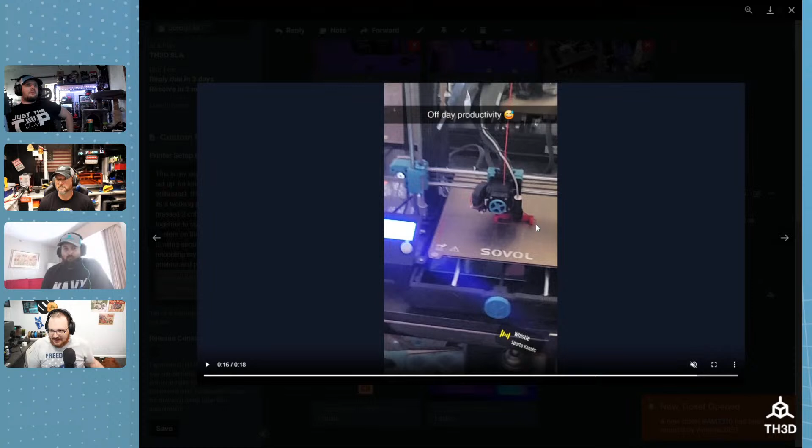Like that's a big ass bedroom. You guys see that? It's bigger than my master bedroom. But the Sovol here looks fine. Everything's in order. He's got some weird 15-50 setup here, but hey, if it works, who cares?

Yeah, like it works. So he sent in some other pictures here too. Is this on? Wait, what the hell is this? Hang on. How much thermal adhesive? Oh my god!

Is that two-part epoxy? The whole tube? That's the whole thing. And then it's like ground out. He ground it off, straight. Hang on, yeah, the red light district in the hallway. He just likes his RGB lights.

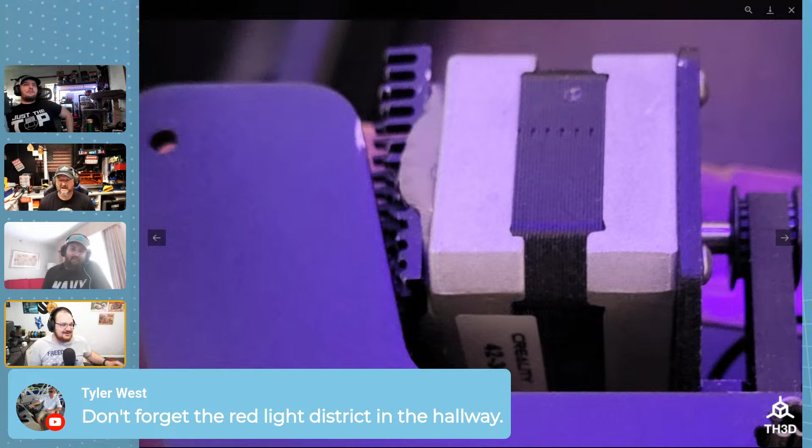I was thinking, is that JB Weld or is that thermal paste? I don't know, I think it's JB Weld. I mean, it'll work. Take a grinder to it. We took the grinder right to this though. It's for the bed plates.

So I think he might have mentioned a comment there. You can put it on the side or on the rear and the bottom, so you can have two there without it interfering.

Okay, so this must be the jank printer. What did he say here? He said, this is one of the first printer builds I tried to rebuild, I've been trying my best. It's good use case, why I probably should have sent it to you guys for the precision care. I fried the motherboard worse than a hot water cornbread.

Hey, I've fried my share of boards when I've been starting off, but you've got a bunch of machines that are worth messing with. The grinder is in the hallway with the red lights and stripper pole. Hang on, let's see, I'm gonna go back to that and see if there's a stripper pole in the hallway, because I saw—hang on, can we appreciate the laptop that's just propped up on a bunch of shit here?

It's sitting on top of the gantry. It is, I mean, it is a big printer. Okay, to be fair. Hang on. Wait, hang on.

Oh, we all saw a glimpse of it. Yeah, there's not enough of you there, and this video player sucks in our ticket system. So what I was going to say is...

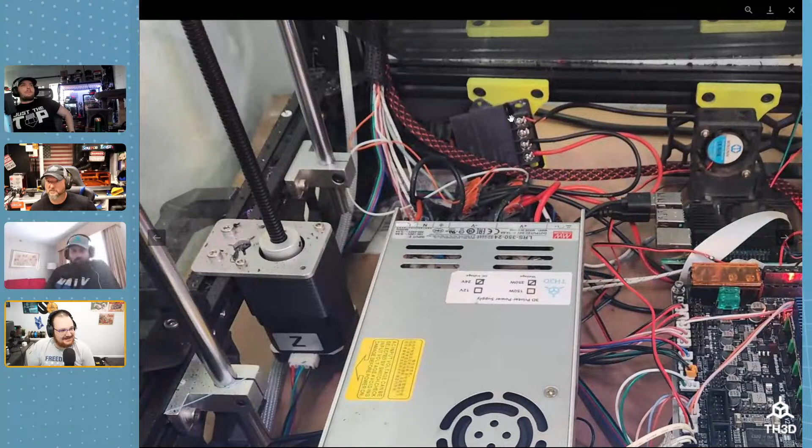So the power supply had died, and the new one didn't fit. What? That's powering the Pi. Why is this just thrown in there? Didn't have room, and I didn't have a mount. What is this giant spacer here for?

It's nice and clean. It looks like the lead screws were too long, and they were hitting on the hot end. Why did you just cut the lead screws? Are these Delrin lead screws? No, they're coated, just black coated. Why wouldn't you just cut it properly? I didn't have anything to cut it with. It looks like you were doing it with a handsaw.

20-minute print. It looks like those wires are trying to spell out SOS, the way they're curved around there. There is not a single zip tie in this photo to manage these cables. No, there is, look. I cannot. On the right. Wait, where? There's the lead screw. There's a cable tie. Yeah, there's one. That's not a zip tie.

Oh my god, look at the tension on a couple of those. There's not an overload of thermal paste there, so he does have that going for him. I expected better. Oh, you are using the Monster 8 in here. I noticed the CAN bus port is empty.

Everything's wired back to the hot end directly with plugs and everything. Is it? Yeah, but this is just like I had stuff lying around. I hate the enclosure top. This was the precursor to the Beast, and I've learned a lot since then. I think I did this like 2 years ago.

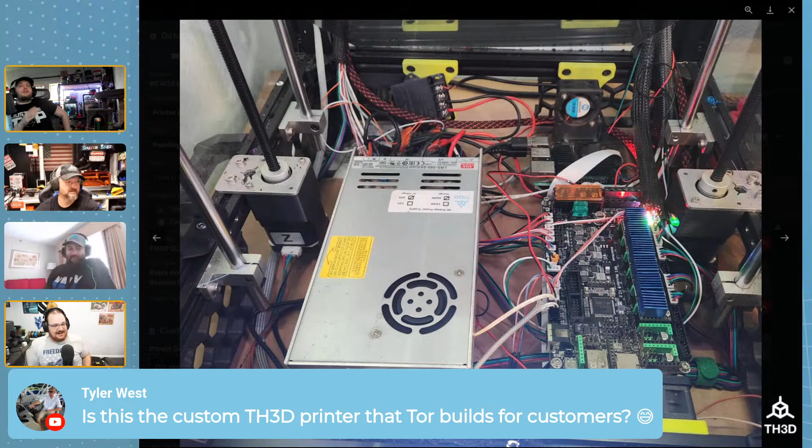I'm just shocked that your printer is this messy. Even all mine are zip tied and stuff. No, I did a lot better job on my other printers. Tor does not build any of our customer printers, Jordan and I do that, because this was the precursor. We actually understand how to do cable management, unlike Tor. I had good cable management at one point, and then I had to take it apart, and it didn't go back together. I can see that.

Let's see, the next one—I'm going to change this guy's account because it's just his name. Hang on, no, it's his email. Yeah, it's his email. I'm just going to change it really quick.

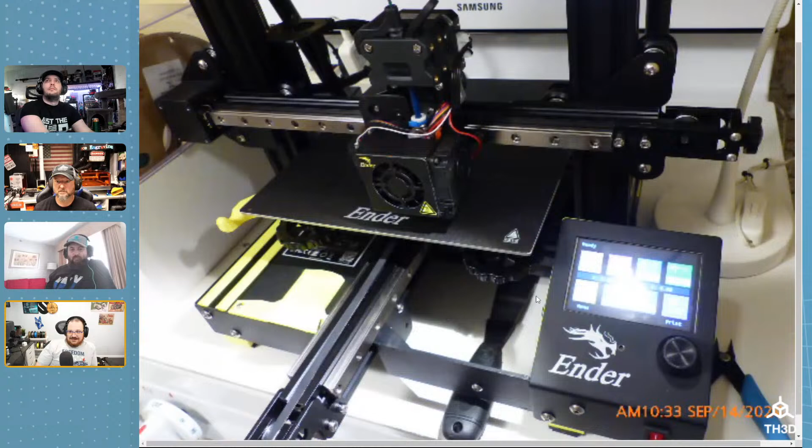I will say though, when I read that list of mods, I did not look at any of these photos before I started the stream. I was expecting with that long ass list of mods that it was going to be a horrible mess, and the wire management is actually pretty good on here.

Hey Tor, he's got your little grabber on there. He's got our new V2 bed mounts on here. He's got the little grabber printed out.

I was hoping for more yellow 3D printed parts because I thought it was going to be a full-on Velveeta theme, just like the rail covers. Wait, you have that grabber in PLA? No, wait - it does match the warning sign though. At least the PLA matches that. Yeah.

This was a regular Ender 3. Did he say this was a 3 Pro? Or Ender 3? Doesn't look like it, look at the center rail, the bed rail. Yeah, no, it's definitely the Ender 3.

But here's the thing with the rails, the Ender 3s with the rails, I did a rail upgrade kit on my buddy Sean's printer, and they fly. On the plus side, with it being on the stove, once you enclose this, you can just turn the stove on. You got a heated build chamber right there.

Assuming that it's an electric stove. And like he said, he's probably got the vent too, so he's already one step up. He's got the cooktop, so if it's a convection oven, it'd make a great filament dryer.

Maybe he stores the filament in the oven. I really want to know if this oven's plugged in. The only thing I could think of is maybe this is in a basement, and his house has 2 kitchens, because sometimes you'll have kitchens in the basement. I'm wondering if it's one of those situations where he just has an extra stove and he's using that for this, because that's taking up part of the countertop, which would make sense.

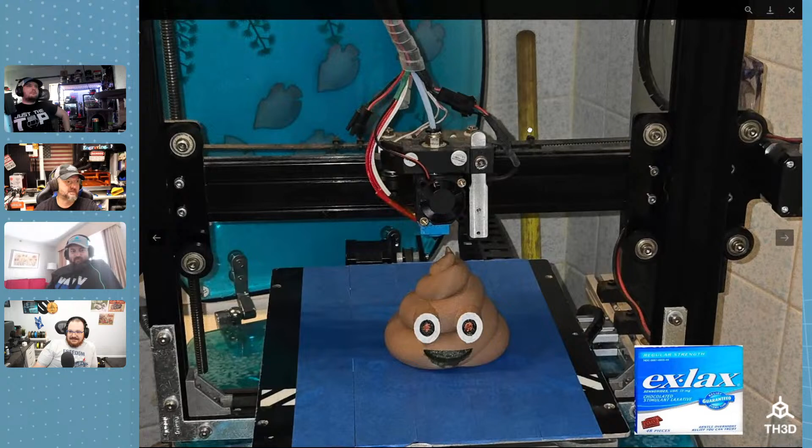There's not even a layer fan on this thing. Those 90 degree brackets, did he Photoshop some Ex-Lax in here? Those 90 degree brackets are Home Depot brackets. Are they? I can't remember if this came with one, pretty rigid.

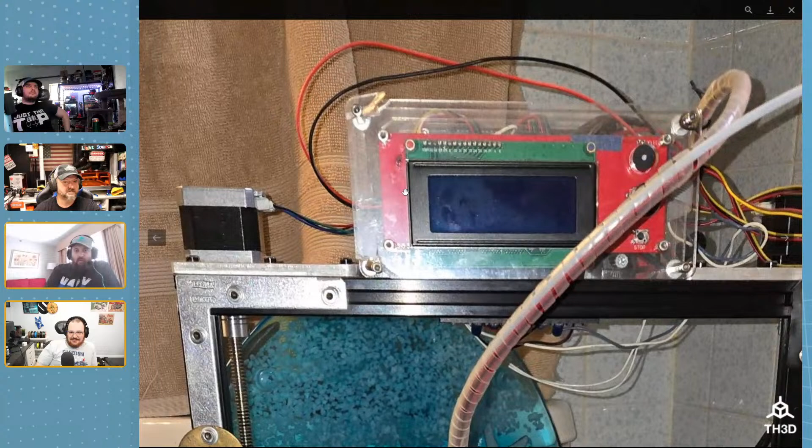Man, I haven't seen one of these in forever. Oh, it's got the old 2004 LCD. Yeah, these are Stanley brackets, they say Stanley right here. Yeah, they're the Home Depot brackets. Why is there just a 27 tag on here?

This looks like some sort of industrial tag, like a cattle tag. Is it? I'm pretty sure, gosh, that's a livestock tag.

He's got the shitter lid. I mean, yeah, there's... Why is it on? Is it because it's shit? Is that why you posted it in the bathroom? Tim, I'm guessing that your baby has better control over bowel movements than this printer has over the filament.

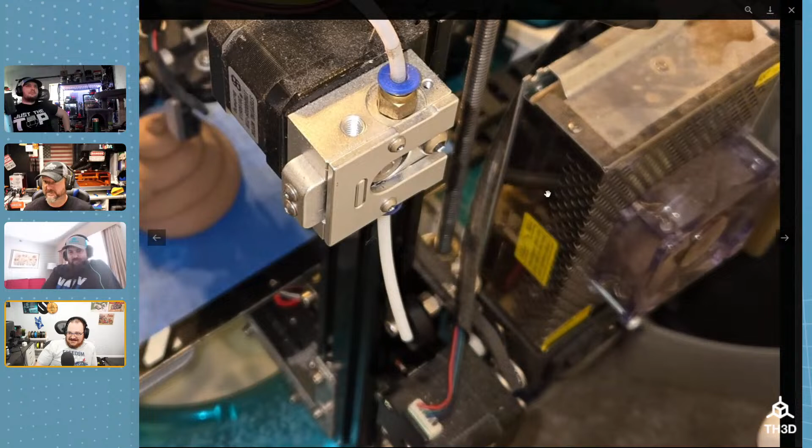That's probably accurate - oh my god, we got some old LED PC fan on the power supply, that's a fire hazard. Is that fan crooked? Like the actual fan inside the housing on the power supply? No, I think the actual fan hub in the center is tilted because it's so old. Yeah, probably, the bearings are probably gone.

I'm curious to know if this actually works. I remember seeing these extruders come out on the market. This was some Chinese company that put these out, and they were horrible. Look, you can see here he's had that tubing in and out a couple times - there's the teeth mark from the PTFE on there. I wonder if it just keeps pushing it out.

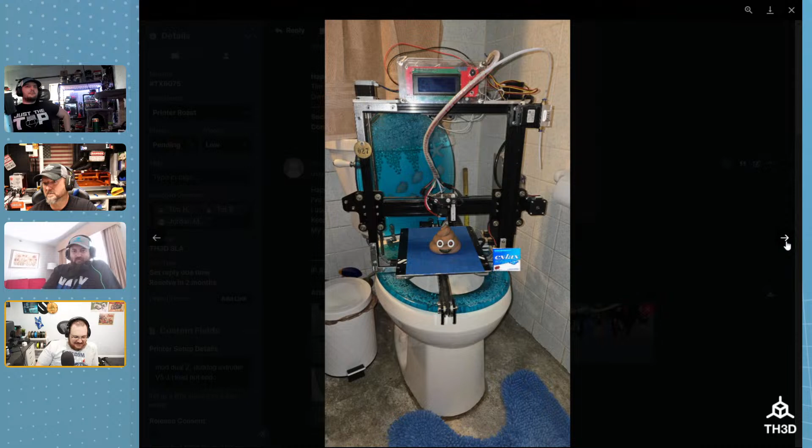I really want to know if this actually prints. Are there any more shots of this? Oh, hang on, I'm going to use my AI thing to ask - my neighbor's calling me. Yeah, that's okay, we'll see. Oh, I'll text him, he probably doesn't know that I'm streaming.

This thing looks like it has more tangles than wired earbuds. I mean, geez, where's a zip tie or two? That would be nice.

Why is the control board on the back of a toilet seat? Oh, okay, it's right here. What a wild setup - that's how it was stock, I'm pretty sure. This was one of the first printer reviews we did, the Tevo Tarantula.

Oh, that looks more like the Tevo Octopus. Is Tim the neighbor that doesn't like me? No, that's her husband. Oh, her husband doesn't like me. No, the wife doesn't like you. That was the husband that was calling me - it was Matt, Krista. Yeah, I want to know, I do want to know.

I expect a follow up on where to get this toilet lid and seat. Why is it number 27? Yeah, I don't know, is he - I don't know if he's in. He just had it in the workshop and was like, 'yeah, this will go on it.'

Okay, so that was Mark Logan. The next one here is Scott Kane. He said, 'Mr. One Printer here.' I'm just gonna change his name in our system to Mr. One Printer. He's got Klipper on it - oh, that's why he has one printer, he ain't got time for more than one dealing with Klipper. I like his space blanket enclosure.

You can get those toilet seats from Walmart, they're the clear resin ocean series. Wait, does this come with a 3D printer?

Hold up, what is this? Is there so much glue on this bed that it looks like a flex plate? Because I'm pretty sure this is the glass. That's not a flex plate, is it? No, it's just layers upon layers of Aquanet. Oh dear God, because you can see the clamps - you can see the clamps in the front and the rear, Scott.

Oh, it's glue. So how did you make the glass surface? Is this glass? Heck, you can still upload - yeah, that printer's still laying down layers. It's going to lay down its resignation.

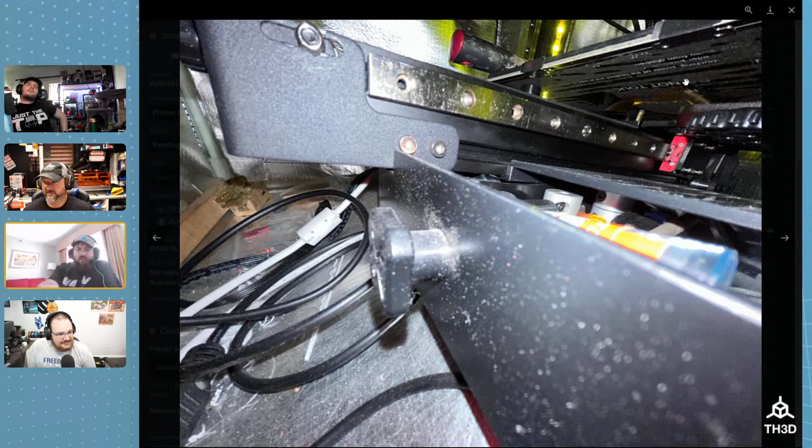He said it's glass, how did you make the glass surface? How did you get it so... what is that? Oh, there you go, that's a good angle, you can see it's glass now, you can see how thick it is.

Oh, did you put adhesive on an adhesive backing and then rip it off? Yeah, it looks like he had some sort of insulation on there at one point and then took it off - maybe he had to replace the thermistor or something. Oh, look at his hardware - the camera's just sitting there rusted. Is it? Where? On that last picture you could see it's starting to rust, on the rails inside there. Did somebody not properly lube them? Yeah, they need to be lubed.

Dad, this is something. Wait, we put rails on the Z and the Y - the axes that don't really need them - and then the X can just use rollers.

Why is the Pi in the enclosure? Do you hate your Raspberry Pi? Look, the cords are long enough that they're coiled inside the enclosure. He's baking that Pi. Had to replace the thermistor.

Yeah, that's a pain when you insulate the bed. I mean, if you clean it up it would look a lot better. Man, I hope he wins this so he can buy a flex plate.

Your first layer is way too close, bud. Way too close on that first layer. If it's embedded into the glass, that doesn't tell you.

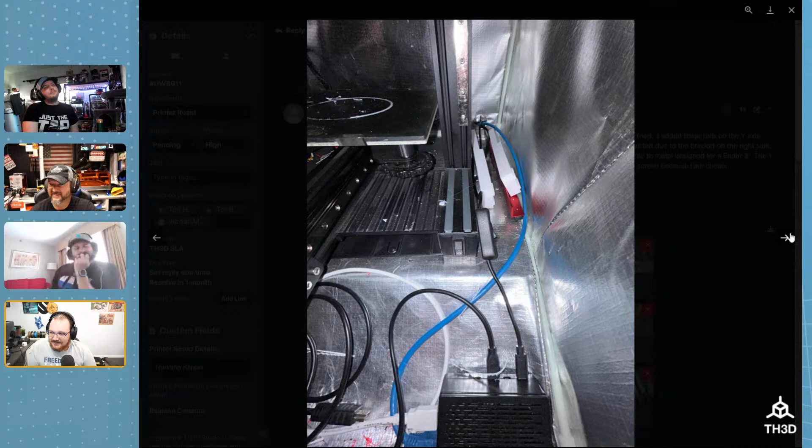Wait, future upgrades - he's just prepared. Hang on, what is this down here?

There's like a random block. No, it's like a thing of putty or something. I have no idea. We got the mega brush.

Oh well, see, he figures if he's gonna bake the main board, he might as well bake the Pi too, so they're both equally baked.

Okay, so this is from Steve C40. He's got a Bambu X1C, a Mini, and a V0.2. Let me - this one was like an attachment, I think this is the same photo.

Okay, so we got clamps. I will say, is this the official Bambu mounting for this? Because this is a horrible idea, having all of this weight on top of this.

Oh wait, hold on, I spoke too soon - it's bolted to the wall. I was about to say, man, you were ballsy putting 4 freaking spools of filament on top of this printer. I was about to tell you to take that off because you're just going to be absolutely screwing things up.

Okay good, oh it's a spare Revo nozzle on the last printer. That little box - oh, and a box. Okay, I was wondering what that was. Let's see.

I'm just looking here, studying the picture. Oh wait, someone has an HTC Vive.

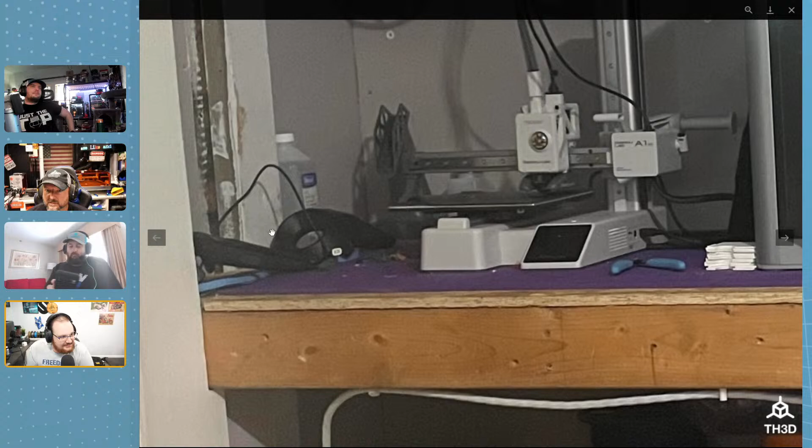Tor, I have my stuff right here on the wall. Yeah, Tor has my old Vive - I gave that to him when we decommissioned it.

Glue stick - someone likes glue stick. Some sort of, this looks like a flashlight charger and mount here. Streamlight battery, is that what that is? Yep. Are you a flashlight nerd? No, not really.

But see, he needs more clamps - all the clamps. There's still space on that shelf.

Wait, what is this - is this an AM8? This looks like an AM8. I have questions. Tilted Z.

This looks like an AM8. Is this an AM8? I hope he's in chat. Did anybody see if he's in chat?

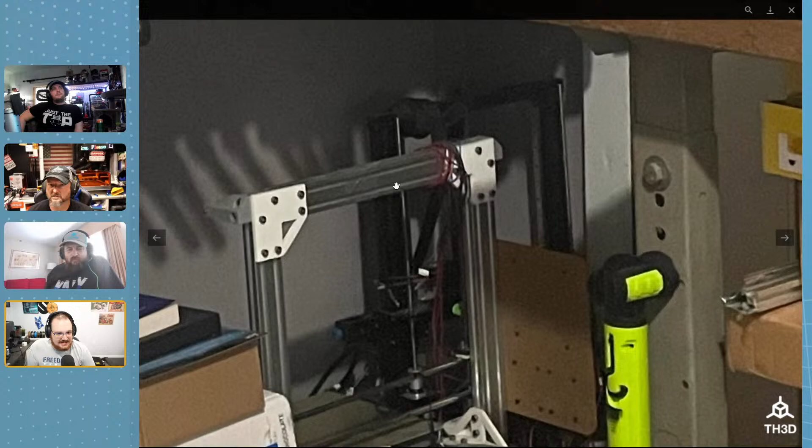There's another printer back here. This looks like an Ender 3V2, look at the tensioner here. Right, well that's what I was gonna say. It's a V2 with linear rails on it.

Why is this just sitting here? No, that's lead screws, because he's got a Bambu. This definitely looks like an AM8, which is a metal frame conversion on Thingiverse for the ANET A8.

I'm assuming this is his V0.2 Tor. It's right here.

It's just not completed. Is that gantry crooked on that printer? I can't really tell. I think everything's crooked on that printer. Yeah, that Z looks like it might as well be a roller coaster.

Something tells me he said, I'm tired of figuring out how to run a printer, I'm just buying a bambu and throwing these on the floor. It's like, screw it, play with these later. Then he starts to build a Voron. It's like that Toy Story meme where he's throwing the toy in the bin because he found a new toy - that's literally what happened here. Just letting him decay.

Is that a PS3 sitting down here? Does it look like PS3? Looks like PS3. He's got a resin printer.

So this is just the printer graveyard of stuff. We're just gonna forget that these exist and move on with our lives. I would say those printers specialize in printing sorrow and despair. I don't think they're printing much of anything anymore.

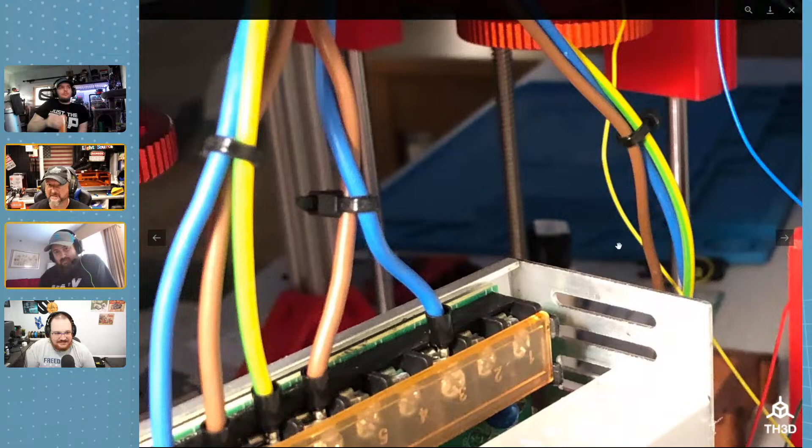Hey Tor, he used zip ties. Yep, he used zip ties. I have a cable tie in there. So this is under the board - this is impressive for a 15-year-old. Like, this is impressive for a 30-year-old making their own printer. Yeah, it actually is pretty solid.

And we got the dual Z's driven by a single stepper. I'm assuming this closed loop belt's going to go over to here. I don't know what he's printing them on, but the print quality looks decent on the parts he's printing. It's a good start to a machine. It's pretty cool, I'd honestly be curious to see this actually running.

I like the Core XY, I just hate the belts in the front. Even like the rook, yeah, it's like I hate that. Yeah, I like the belts in the rear, like on the Mercury, so you can actually see what's going on.

Oh my god, I'm sorry, I'm yawning. I did grab some caffeine. I mean, I really can't shit on it too much. This is actually a pretty nice build, it's pretty solid.

Yeah, no, definitely. All right, our next one is from Kirk, and Kirk says he's got a Creality Ender 3 V3 Plus. I haven't seen one of these. He relocated the filament sensor run out to the top and a top mounted spool from Embrace Making. He's running about 200 millimeters per second, no support at 210. Creality hype. I thought he was printing, but no, it's just

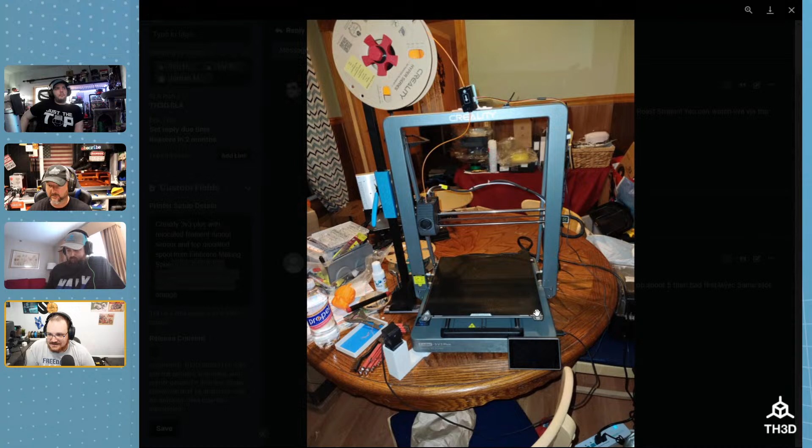I do not like it. There's so much stuff in here, though. And a square printer on a round table—that's just bothered me. Wait.

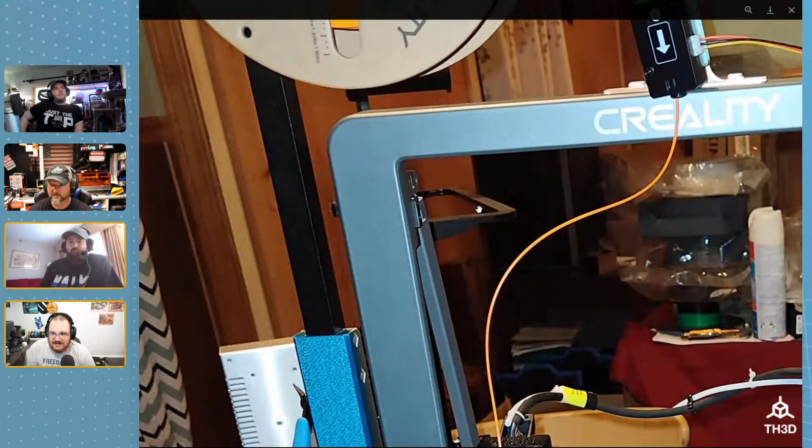What is going on? Oh, this is an aftermarket printed shroud. With some maybe banding going on here. Either banding or... wait, hold up. What? Okay, hang on. So he's got this, like, isn't this the DIN rail mount stuff? Yeah, and this is bolted to the printer, and that holds the spool.

That's interesting. Look at all this stuff back here. What is going on? There's so much crap here. What printer is that? This has got power.

This Ender 3 V3 Plus, which is their Core XZ printer. I'm sorry, do you see when I move this, the image just wants to keep moving? That's just whatever image preview on our ticket system is doing that. I don't know, what do you guys think?

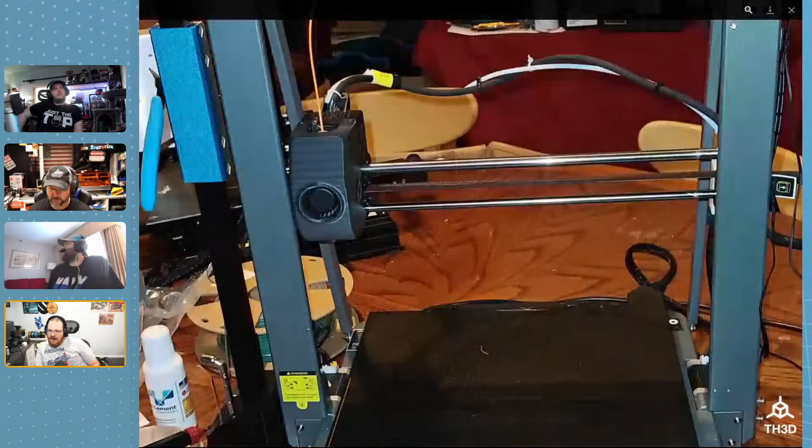This is like the room in your house you throw everything into. What's at the front left corner of that printer? Just a camera bodged on there. Oh, but look, there's hot glue.

There is hot glue, I spotted some hot glue too as well. Assortments—there's like four assortments right here in a Tupperware container. Wait, there's another printer back here. There's an Ender 3 here, sitting in the back.

I gotta know, I want to know if this is how this printer is used, or if he just works on it on this table. Like, I have a feeling he uses the printer on this table here. That is his home. The rest of the house looks like it's in fairly good order. Maybe this is like the one room in the house. His wife's like, 'You're keeping all your stuff in here since you don't know how to keep it clean.'

Okay, did you write that one down there, Tor? Yeah, Kurt. Let me see here. I gotta just change the user so it doesn't show their email. Oh, these next two are refresh it because I'm merging them, they're the same person. Okay, wait, the Moundby one? Yeah. Okay, let me know when it's merged. I'll refresh it, I merged them. Okay, let's see here. All right, so Moundby one says here, okay.

So he's got a Core XY that he shipped across the country. 'Could fix this?' Huh, I don't know what that means. All right, oh—ooh, oh yeah, shipping is fun. Someone shipped their printer fully assembled and didn't lower the bed all the way and pack it down.

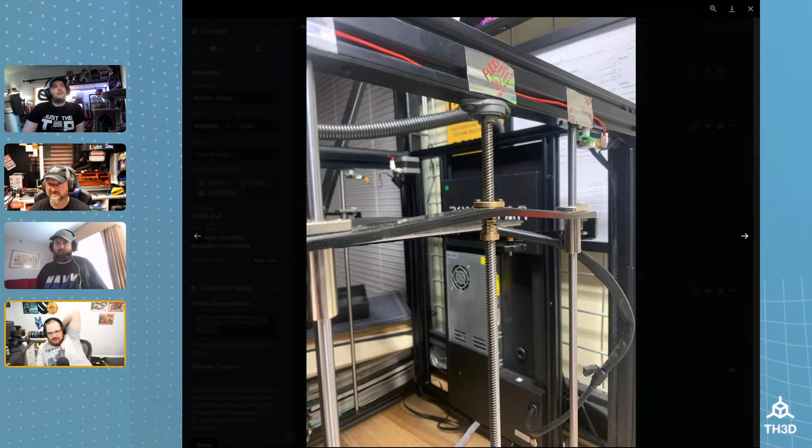I haven't seen a Zone Star printer in a while, I haven't even looked at them. Are they still in business? Was this an old printer that you bought off somebody? I'm really curious. And then he's got an A1 part that came loose.

Oh, effing chat, oh that's not gonna—that is not gonna be fun. Yeah, well it's on the duct and everything. That's roasted, I would heat that sucker up and start trying to pull things off. If not, then hit it with the heat gun. And now that's when it's handy to have your printer built on an oven, because then you can just heat the whole thing up, stick it in the oven.

Oh man, all right fellas, I gotta go, we gotta go take the boy out to dinner. Oh, you're fine, I know you had something else going on. Yeah, he got his orders late, so instead of him leaving tonight, he doesn't leave till Sunday morning, so we're gonna stay out here in Chicago with him. No, you're good, you guys all over your sickness? No, because now I got it. Oh, that sounds fun. Yeah, Taco Bell nightmare. You guys have fun, we'll see you later. All right, tell him good luck.

This is later, Emerson. So this is a prime example of how well Bambu's AI failure detection works. Oh yeah, that one does have that, it does have the failure detection. Man, this looks like this was a fairly decent printer. Is this a Core XY? This looks like this is a Core XY. Yeah, I think you said too, yeah, because the motors are in the back. You got one left, man, that's painful.

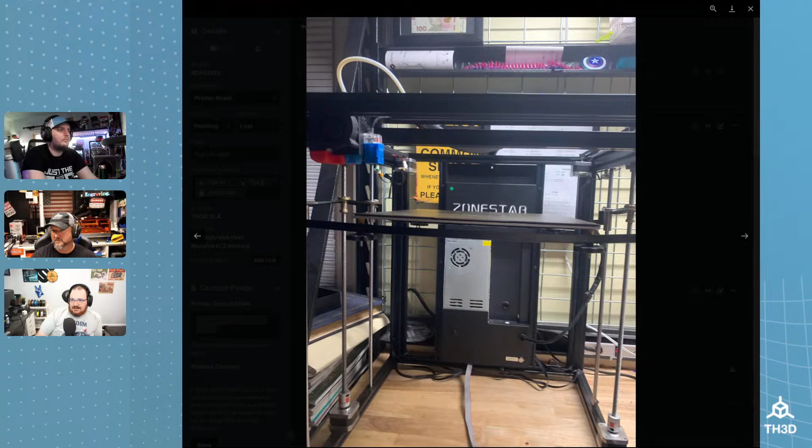Bambu Lab A1, I'm just going to go to the A1 page. I thought it had it because it's supposed to take pictures and every so often send it off for processing to their cloud. Was that the A1 or the A1 Mini? I got to double check. I think that's the A1. Yeah, that's the A1. I could have sworn the A1 had AI, that was like one of their things. Or did they not put that out for the A1? Doesn't the P1 have AI detection? No. Because it's... hold up.

Filament tangle sensor, filament runout sensor, filament odometry, low rate camera up to 1080p, chamber monitoring camera, it says it has. Yeah, on the A1 you can just view it. Oh, so okay, I learned something today. I did not know the A1 did not have the failure detection. That is really interesting. Okay, well, I learned something today.

Thank you, Feven. The P1 camera actually has a better quality picture than my X1C. Like I'm not even joking, it literally has better quality than my X1C. My X1C's camera is horrible for how damn expensive that printer is. Yeah, it sucks, it's absolutely horrible. My P1S is not a very good camera at all.

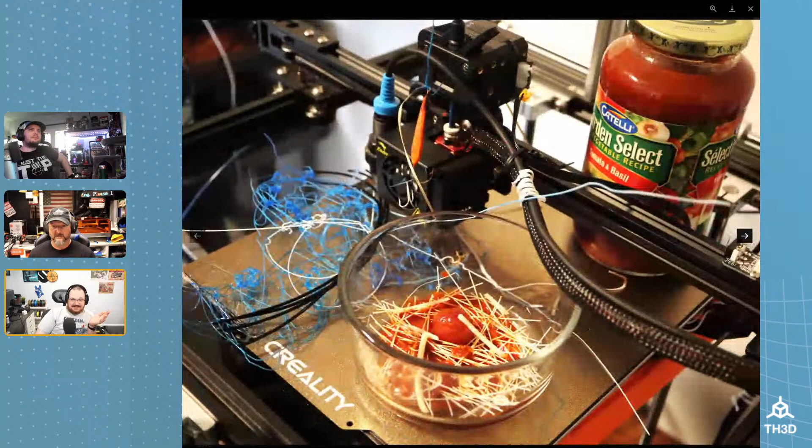If you're not getting a first layer down, I would change this. This is actually going to affect how it prints quite a bit. We do offer tech support, so if you want, we can sit down and I could definitely get this thing running over a video call.

This print looks like a cry for help from that printer. It's like, man, the Italians are not thrilled with me. My question is, did this print? There's Italians that are like, why? What is it with Italians getting so upset about you not doing exactly what they want, like they're ruining our culture? Okay, this guy never sent pictures in, so we're just gonna trash that one.

Steven Altman's next. Let's see, got another Bambu X1C. I have it in the den off the living room, and it's very loud compared to my A1. Yeah, the X1C is a loud printer. So if I chose to try to quiet it down, it has a muffler, and the engineering failure of having a fan with the doors having to be open and the top off is absurd.

The fan never gets used, the advanced filament mode doesn't matter. I guess it filters the dank air when the door's open and the top is off the printer. I mounted 2 fans on a custom bracket, placed inside the filter housing so I can keep the door closed and the lid on, so it's quieter - drastically decreases the noise. It's wired into the power source and back in tandem with a modified bento box with a thermal switch. When the temperature gets to 35, it turns the bento box on as well as the exhausting fan. Keeps temperature between 33 and 37. I unplug it when I do advanced filament.

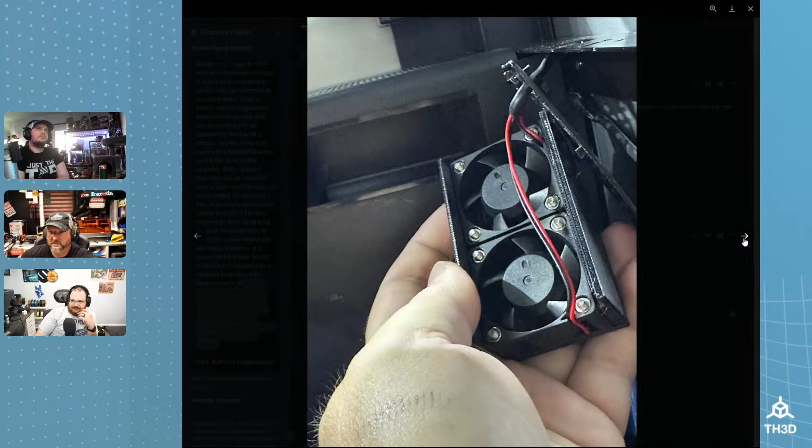Well, that's my little Frankenstein. Let's see. Okay, so there's your bento box. Oh, it's all taken apart right now. Okay, so these are the fans he's talking about in the little back box here. I hope there's a picture of the actual printer in here.

Holy glue, Batman. Holy fucking glue bottle. Oh my god. Wait, where is this going? This obviously connects to here. I think it's coming from the bed. It looks like it's coming from the bed, doesn't it?

Hang on, is there more pictures? No, that's it, this is all we have to work with. What is going on with... I want to know what this is for and why this is going... unless it goes to the bento box, like this wire's going down here to the bento box. But the bento box has power right now.

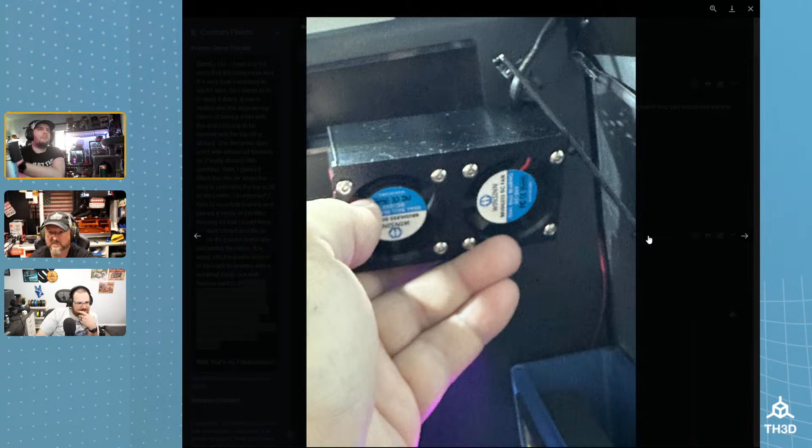Were those the only 2 fans he added? That's what... well, there's some in here in the bento box, but I'm very confused as to what this other wire is. I have more questions about this extra wire coming out here. That's going to the control board in back, or the power supply. Wait, no, here's a wire here going down to the bento box. What is this one going to the bottom of the bed for?

Wait, did he... hang on. Is that for the door open, the thermal fuse that he was saying? Oh, that might be for the thermal fuse going to the... that's a weird place to have it. Well, it's on the bed, so this is probably what this is. That's probably what it is - a thermal fuse, or the thermal switch, I should say, not a fuse. That's the only thing I can think of because he mentioned the temperature - when it gets above a certain temperature, it turns on and off.

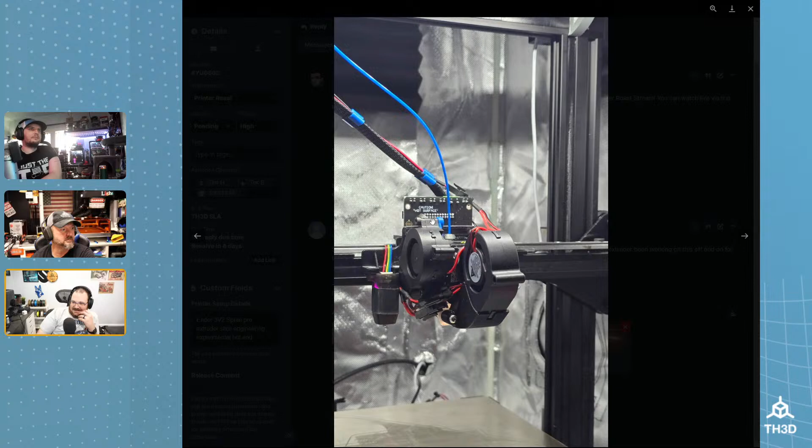Oh, he's got the little Nathan Builds Robots breakout board here. On the Ender 3 V2, that doesn't have a breakout board on the hot end. I wonder if this is like his quick swap thingy. You know what I'm talking about? Nathan Builds Robots made that quick swap thing, I can't remember what he called it. This doesn't look terrible, look at, he's got clips for his wire management.

It's a Sprite extruder. Oh, he's using the breakout board, the Nathan Builds Robots breakout board, for the Sprite extruder. Because there's a Sprite extruder here, and he said he's got a prototype hot end from Slice.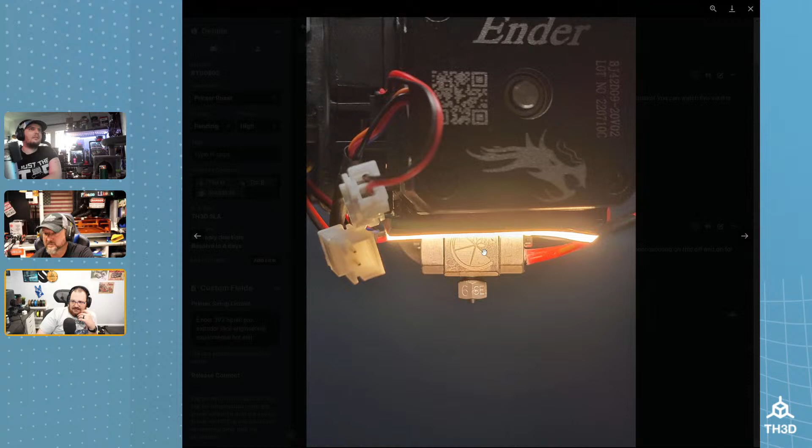This looks like maybe the Copperhead. Is that the light Copperhead? That worries me. It's okay, the double stick tape will hold it. It's definitely not going to come off during a print or when the motor starts getting warm, and just short everything out. Some JB Weld will fix that.

Oh, it's okay, we got a structural fan duct here for the light in case it falls. Ah, there you go, it's right into the heat sink. Oh wait, hang on.

We totally missed, he's got rails on it too. We got rails going across the top here. Are those rails floating? Hold up, go back. Why are they floating? They have spacers. That's not how that works. There's spacers. Why? It does bother me too. It's probably for the belt alignment.

Go back, like to the wire loop on the left side of the screen. Hang on, I think it was right here in a previous picture. Yeah. Why does that look like everything, all the wires were just sliced and left? I think it's just the braiding, maybe, on here. Yeah, I think it's just the cable braiding. Yeah, I guess so, he cut where he cut.

Okay, hang on, so how is the belt getting routed? The belt is still, I think the belt's going... no hang on, the belt is still going under here. How are these attached? The belt's still going through the stock path. How is this rail attached?

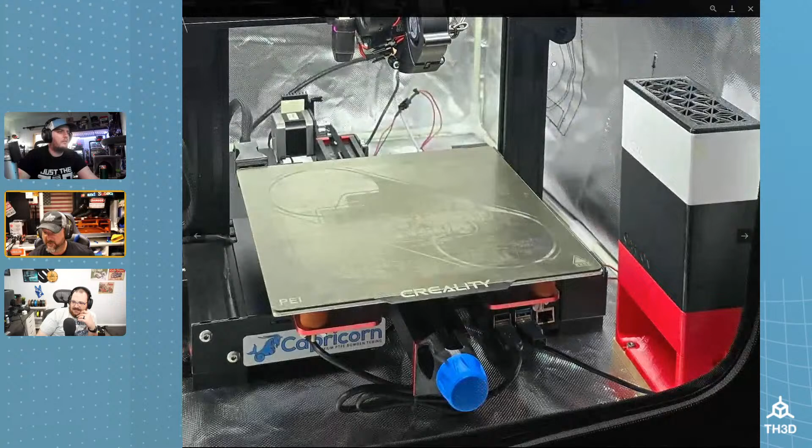I'm gonna look at the details here. Yeah, I have questions. Yeah, see all the USB ports? What, okay, what is with people putting Pis in their enclosures? This is horrible for the electronics, there's these Pis.

Yeah, another bento box as well. I appreciate my printer so much more after seeing everybody else's. Got some extra wires in the back too, those look nice back there.

Yeah, just hanging out. I want to know what this is. I'm very curious as to what this random board is, it's got power, there's an LED on it. I'm very curious to know what purpose this serves and why. I could be wrong, but this looks like a rectifier.

Is he in? Who is this again? Ethan Stewart - is he in the chat? Is Ethan Stewart in the chat?

This is why I wish people would actually come on. I mean, you could win regardless because you guys are going to vote on the worst printer.

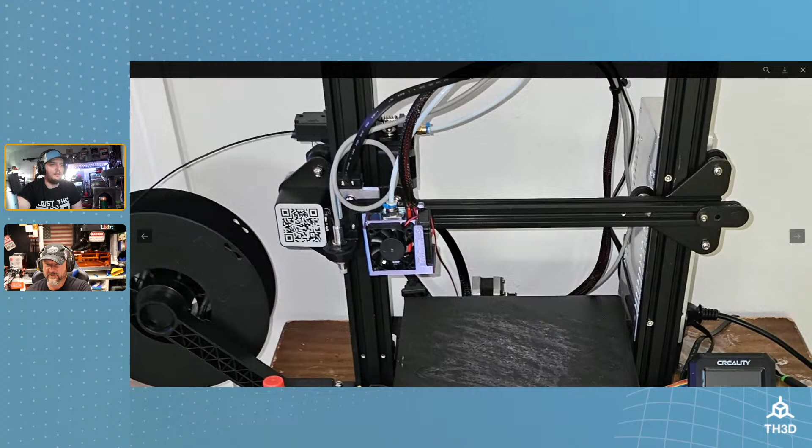Ender 3 V2, I believe, with the color touchscreen. Old EZABL Micro, that's not - oh, our second bungee cord of the day. What the hell is this on top? That's what I was trying to figure out.

Let's see, yeah I mean it works, but oh wait, he just has the Ender's - you have mounting points right here, just screen and screw it in, no plugs, just nice. Multiple SD cards - got one in the printer, one on the side. God, that's going to be gone in the Taco Bell bag very soon. I like the finish on it, looks like an end table, nightstand. Right, it looks nice.

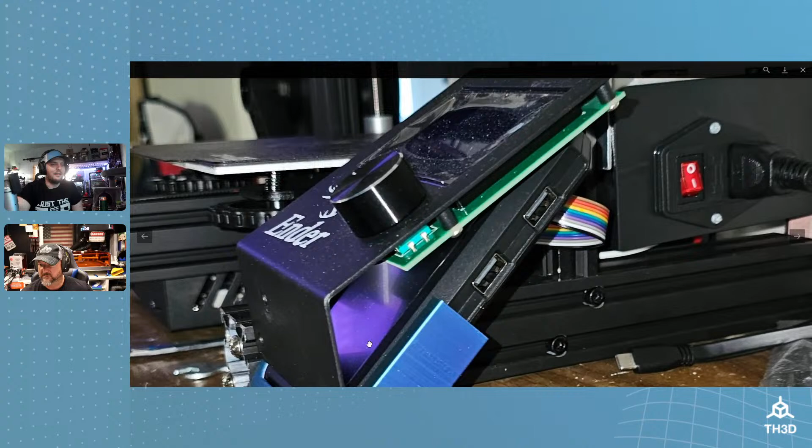Why? He really likes his filament because that's what he did his duct in, and I'm betting it's PLA. Oh, he still has the original cover on it too. Yeah, peel the screen, please. He's running both. All the dings and dents from like 50 years of use. He even has the bolts - he has the bolts for the screen in the extrusion.

They weren't there in that other picture, were they? No, I think they were. Were they? Yeah, they are. They are, oh there, yeah they are. They are, there they are. Wow, just come on, just remove this.

What, like you have the printed part? I don't know why you don't need it, just plug in the screen. Oh wait, where is it in this picture? Is he - oh, I think he switches between the screens. No, why would you switch between screens?

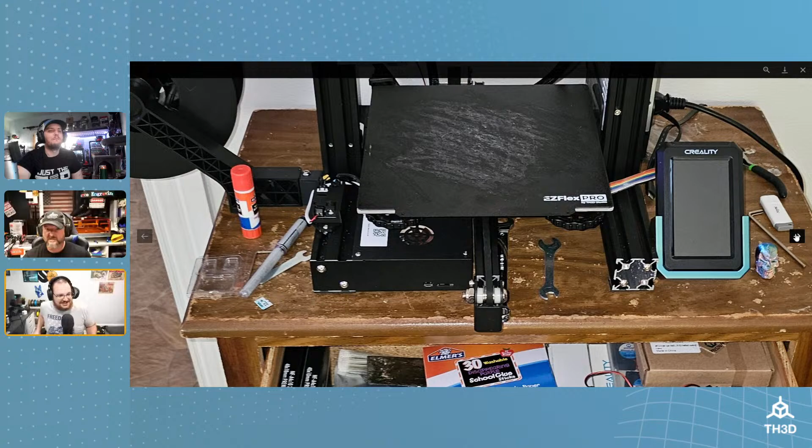Yeah, pretty much. Oh, Winsinn fans - he had to get the pack because they fail so often.

Winsinn knows their stuff is terrible, that's why you can get like 100 fans for $20. True, but the duct is PLA. I can tell, and it's not just PLA, it's a silk. I wonder how many times it came around the corner.

It depends on what silk it is, because some silks, like what we carry... Years ago the silk PLAs, like Poly Alchemy, was the first one I know of that came out with silk PLAs, and the layer adhesion was dog shit. It was horrible. But the newer stuff from us and other companies has typically been better.

He changes his fans out so often he didn't even bother to put bolts in. I think that's a toolless head. Was that Minimus? How many times do you think they've rammed right into that spool holder? It's kind of sticking out right there. You'd run right into it, and it would absolutely knock the entire printer off the shelf. Yeah, that's probably why it has so many scrapes and dings in it.

It reminds me of one of Krista's extended family stuff - this is triggering me. He has a bolt for the screen because he's running the Nebula pad on there.

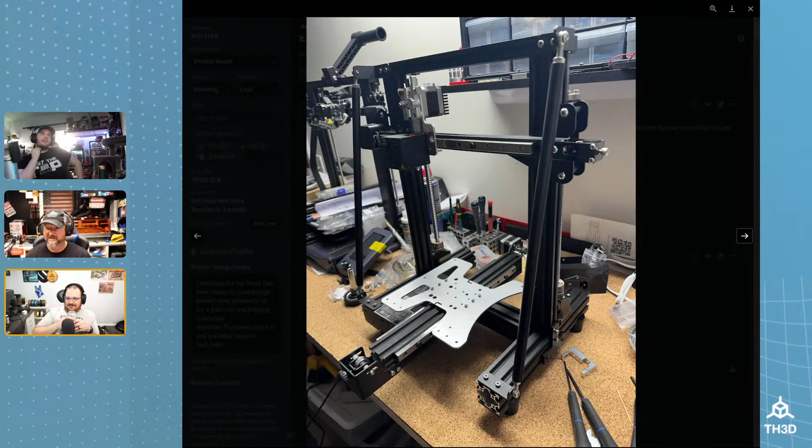Let's see here, so linear rails. He essentially just bought an old car to fix it up and never drive it, is basically what he's going with this. Yeah Tor, that's a fucking ball screw on an Ender 3 Pro, that's a really expensive Z-axis. Holy shit, 2 of them, he's got 2 ball screws on it.

Well, he has a working printer next to it. I know, but I'm saying it still has the peel on the screen. I don't even think that one's being used, that's just the next project.

In all seriousness, if he finished this it would actually print pretty good. The Z setup looks solid. He's got linear rails on the X and Y. This would legitimately probably be a pretty damn decent printer if he finished it.

Yeah Jerry, I love that you're into the hobby stuff, it's fucking awesome. Man, if my dad got into this I think it'd be awesome. They have a printer, I gave him a brand new one, and we upgraded with our stuff, an Ender 3 S1 Pro, so I hope one day he gets bored and starts playing with it. Look, he's even got the fancy ass leads, these ball screws, and these couplers are worth more than the whole goddamn printer.

Like, he's got those XYZ cubes or whatever back there? He must be a machinist. Did he say he was a machinist? Hang on, all right, where he got the feed screws. Yeah, maybe. I would put money on he probably was a machinist.

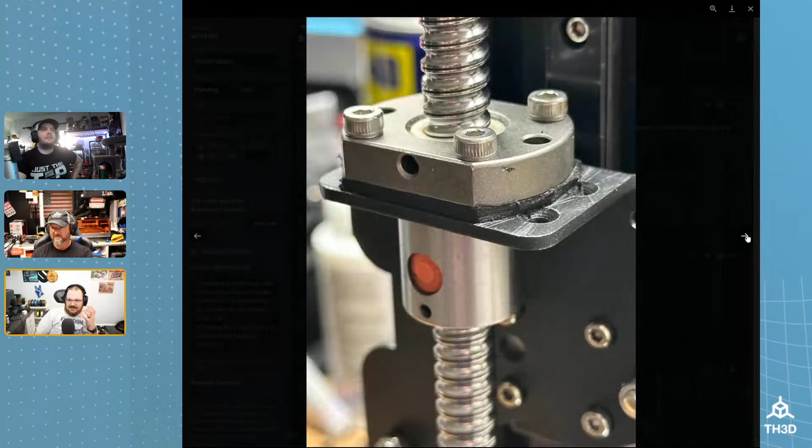This doesn't look bad at all. If somebody brought this to me to work on, I'd be like, hell yeah, we can get this thing flying. He's got a proper sized heat sink on that extruder. Okay, it's got potential.

Let's see, the next one is from Christopher Ford, and this will be a quick one. This is just a pile of parts. Tori, you should recognize this one.

I spent 2 hours on support calls helping this guy get going. The X and Y motors were swapped, as well as the X and Y end stops. He's like, why is it not printed correctly? Why is it not homing correctly? I'm going through the config, checking his wiring. Most of the wiring was wrong, so we had to go through all that. And then like a week later, after I sat through these calls with him to get everything going...

He did this a month ago. Tor was like, oh my god, why did he do this? He was so angry. We had it printing. We had it working and printing. And it's gone. That's not printer setup details, that's not taking it apart. Dude, that's not maintenance, that's not just taking it apart for maintenance. It's about to go into a crucible and be melted down to turn into aluminum bricks. We had everything working. Let's be sympathetic, he probably had so many bad memories. He was traumatized from the printer, and this was his way of dealing with it.

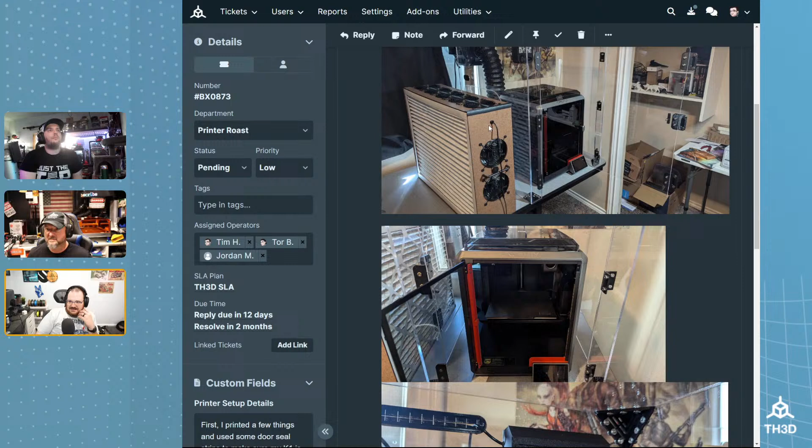He must have a laser. I really don't want to smell my... Yeah, it looks like a nice MDF box. With a nice... I don't know if he made this enclosure. Wait, hold up.

Yo dog, I heard you like enclosures, so he put your enclosure in an enclosure.

This is already an enclosed printer. Doesn't that have a... It has an exhaust, it does. Wait, hang on.

I don't think this is for the printer, because look, he has this venting outside. Okay, I think this is just a DIY HEPA filter for the room.

Maybe that filters the air that's going into the printer, that way it's getting nice clean air. Hang on, so we have a filter here, we also have it exhausting out of the room, and we have a printer that's already enclosed inside an enclosure.

Do you just not like having money? Because this is not cheap. This is at least $300 to $400 between the fan and all the acrylic and all the other random shit. Hell, that exhaust fan alone is probably like $120.

Oh, it's Clearview plastic, so this is an enclosure that a company makes. He says: printed a few things and used some to make a door seal strip to make sure my K1's airtight. I put together one of Clearview Classics enclosures to house the printer along with recirculating HEPA.

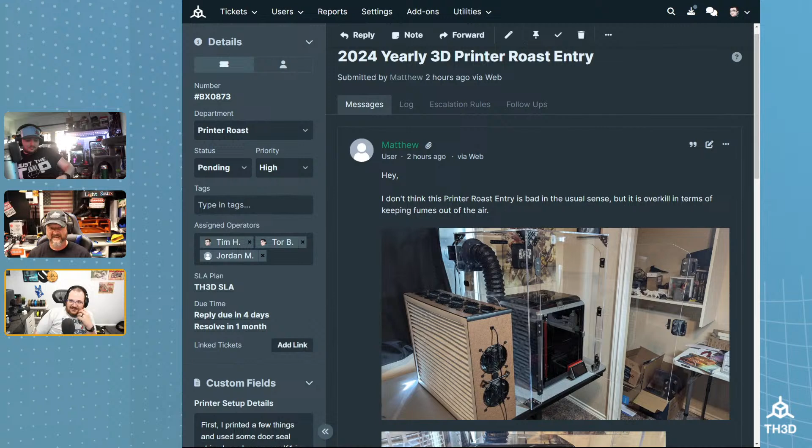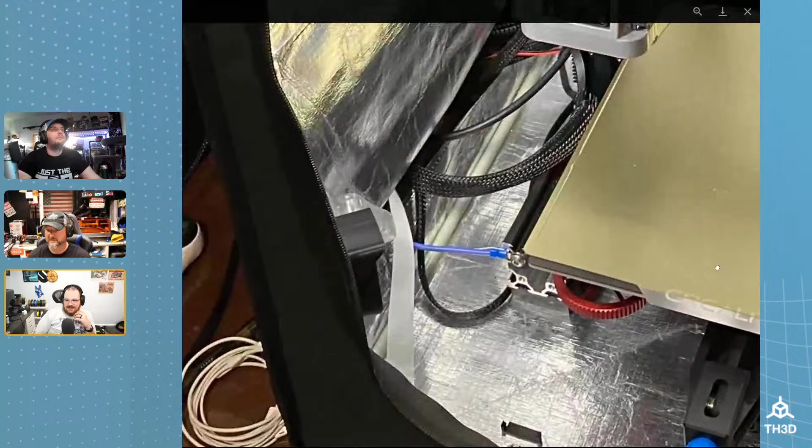Did he ground the frame? I think he grounded the frame. Oh, I think that's the first grounding wire we've seen. Oh wow, oh my God! He grounded the frame. Hey, let's just take an overview here.

So we got a heatsink on the Z step motor. That's not really neat - wait, hang on, these are not going to do anything, all the heatsinks. It's like he has some spare ones from his kit, bought a 10-pack for his Pi, and we're just gonna throw them on the top of there. He arranged them like he was doing tile too, all in these different directions. Yeah, you want all those heatsinks, fans?

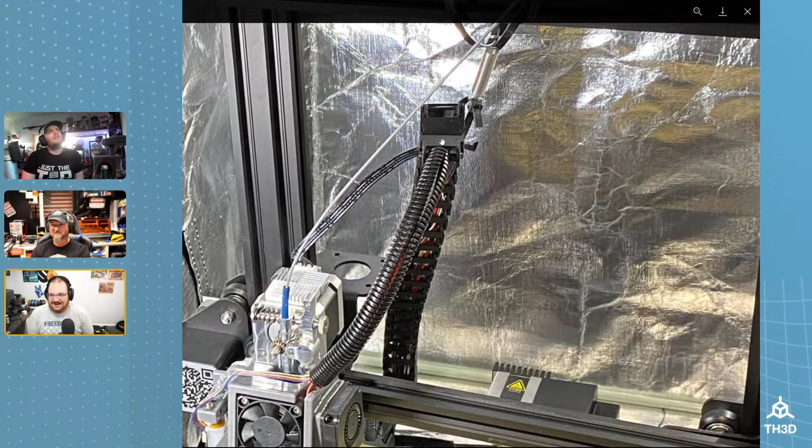Wait, hold up, together, look at the fucking cable chain. Hang on, we have zip ties with a spring, with another zip tie going to a cable chain, and then a corrugated wire loom coming out of the cable chain. Why? Oh my God, that cable chain's got to be heavy. Oh, that's why it's held up with steel parts.

This is painful to look at. Just get rid of the cable chain at that point. It's literally doing nothing.

Okay, we got these weird lights. Look at this weird tube light in the back here. What, is this a fluorescent light? Like, what is this? No, I think that's an under-shelf light that you stick on underneath. It's all blown out because I can't really make it out. It's so weird. Yeah, like an under cabinet light.

I mean, if you want to print ABS, that works. Yeah, this. Or at least you got everything out of the enclosure.

Why is the spool holder so long? Why is it sticking out so far? He's compensating. It's okay, it happens. So he can use the 3 kilo.

So here's the problem with this. This right here, this is rigid. This tubing is fairly rigid. This is creating a pinch point here as this head's moving back and forth, and these wires are going to break right here at some point. This should be tied off. I don't know if you guys know this, but on the Micro Swisses, they have these little holes here on the extruder arms. These are for cable management.

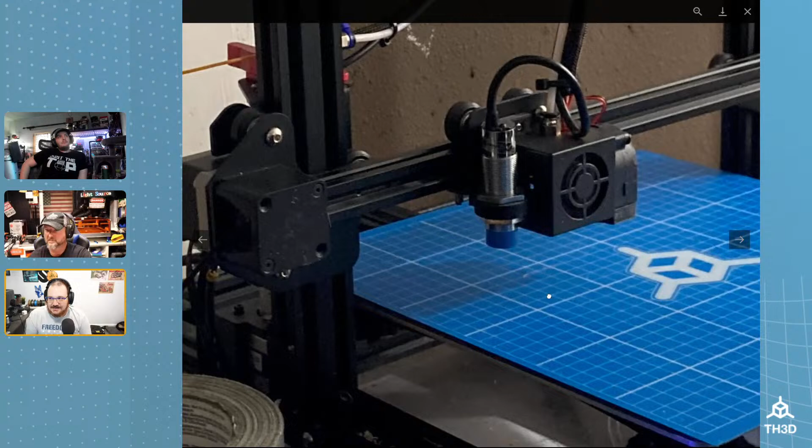He said you can walk away and hit print, and it still works. I like that, I see the bottom frame he has.

Yeah, I saw a lot of people doing this, and he might have done this in anticipation of getting rid of the control box. A lot of guys would build a frame out on the bottom, put your screen here, and bolt all your electronics into there.

But now, is that printer old enough that it connected to the cloud by dial-up? No, it didn't even have cloud. There was no cloud. This is back in the good old days where we didn't have any cloud stuff on our damn printers.

Our old printer didn't have internet. Here's the thing: the OG, if you guys can find the original CR10s for cheap on Facebook Marketplace or something, they're still good to modify and upgrade. They're still good printers. It's just a giant Ender 3 basically.

I've been looking for printers on Facebook Marketplace for something good, but it's all Ender 3s and small printers that I don't want. I want like a Modix or something that somebody's getting rid of for a couple hundred dollars.

Oh, John Mack - I wonder if this is the John Mack we know. He sent a submission in. Let's see, so he just said CR10. John Mack did a half-assed post here, but let's see his CR10.

Okay, we got the little stands here, we got a Velveeta theme - that does look like Velveeta actually. Fun fact: the old CR10s came with these in the extrusion from the factory. Oh my gosh, this is like one of the OG CR10s.

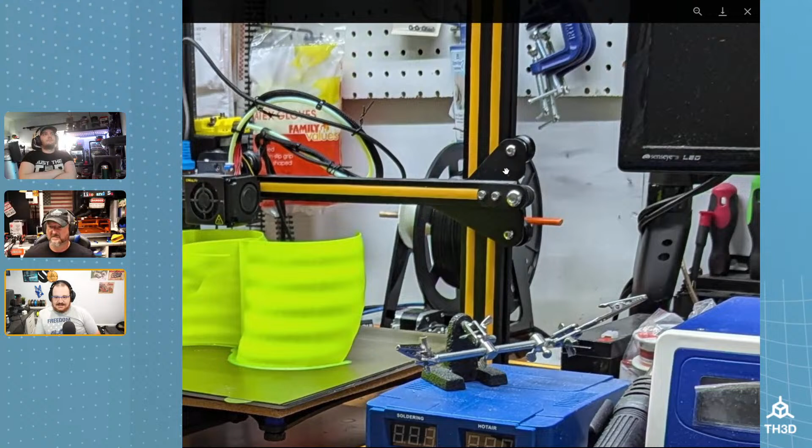So it doesn't even have the second Z. The CR10S had the second Z motor on the right side, but the original ones didn't even have a Z motor on the right side. They only had it on the left. How is he still running the stock plastic extruder?

I don't think you had an old enough CR10 - they came with these old plastic yellow extruders. Mine was black, but mine was like the first ones. They had one with the yellows, this is yellow. So basically he's got it pretty stock aside from adding the ABL kit on it.

It looks like he just solid mounted the bed, threw an ABL on it, and called it a day. I mean, hey, it's printing. He's got one of our flex plates, probably at least 3 or 4 years old if not more - this is one of our older ones with the smooth finish, EZABL Pro.

Damn, did he reprint? Yeah, he reprinted that with a dual color change. That printer's probably eligible for retirement, it's been around so long.

Oh no, there's no such thing as retirement - you keep rebuilding it and keep fixing it, that thing will still run. I mean, clearly he's still using it. That was just an age joke. Yeah, I know, you can keep them going.

Oh, I love that he color matched his filament to the extrusion covers, even the little feet here. Oh, John Mack - from many roasts ago.

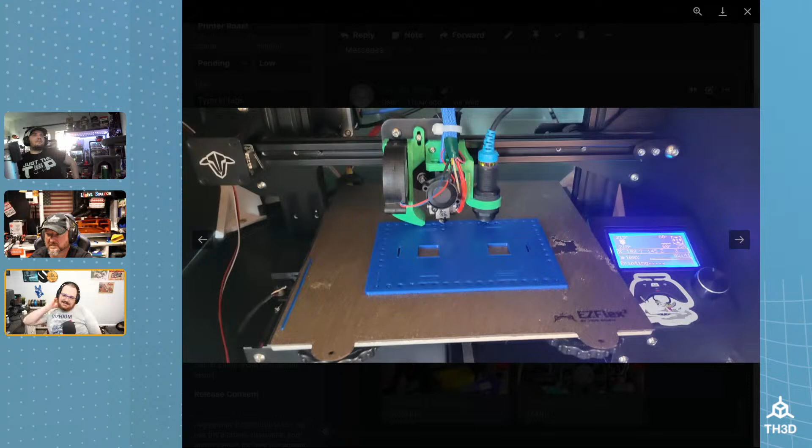Random wires going to the top. What is going on? Did you not have the right size fan? So you just bolted it on the side? What is going on here with the fan? He doesn't have, I don't think he has a heatsink or a duct.

It's just bolted on, stuck on there with one bolt. What is this mount that's on here? It's weird. Hold up. I mean, it's printing, this one has like this.

Okay, this is a newer setup. Man, okay, he's got a duct on it printed now. Heavy duty mount. Yeah, that's a really weird mount. I've never seen that hot end mount before.

This is definitely when it first started. That's got more strings than a puppet show. That poor plate, I can tell he just said screw it.

Oh, Jerry's in the chat. Did he accidentally use super glue instead of I don't know? He did something to that poor plate.

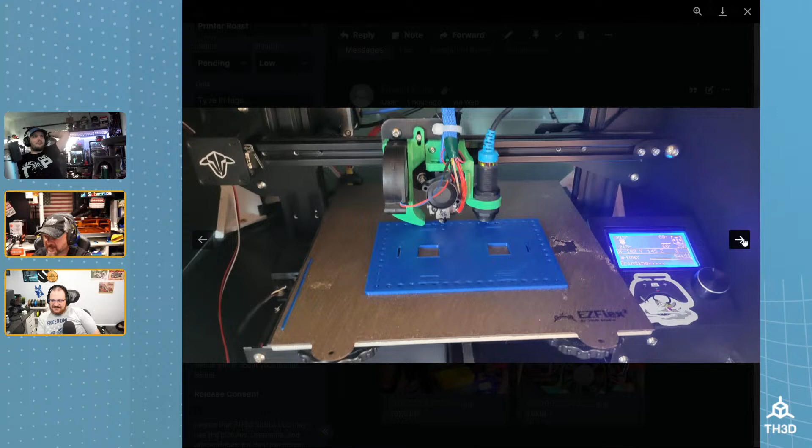Testing out some PETG there. Probably, yeah, that's fair, it's probably PETG. Oh man, I think he still has this Ender 3. I wonder if it caught on fire at least once. It is Jerry's printer, it's very possible that it caught on fire at one point.

Oh fuck, Tor, you're gonna have to do this one. I'm gonna send you this, you can cue this up. I liked his Halloween themed wiring that was going up to the top of that printer. You're gonna have to do this one, Tor.

Oh, that's why. It's mine, I can't do my own. Can't do my own. Here it is.

So we all, Chiron, oh this wasn't the... you got to show it on the... Jerry said it's never caught on fire.

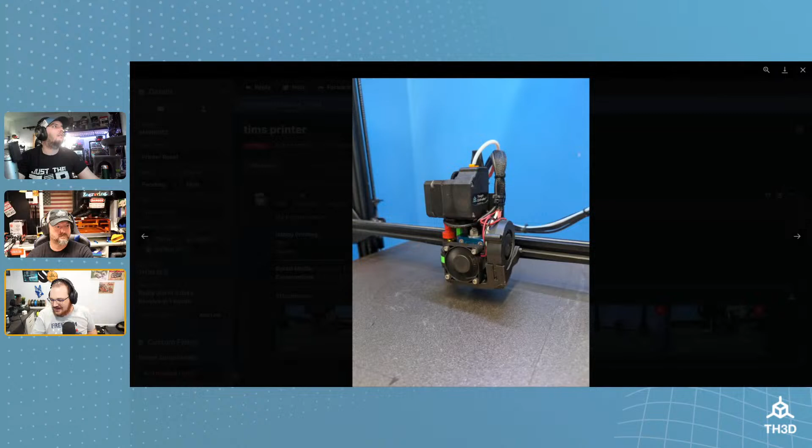This is running our old... I can't remember the name. Oh, you actually have the different duct too. You didn't even clean that up. Yep, that's our old multi-mount on there. That's one of the first ones that we had made.

What's going on with your screen though? It's old, okay, it still works but it's old as shit. Okay, it's a B-stock one. Working, I don't get new. I don't get. And the plate.

Wait, you still have the glass plate on it? You didn't remove it because it's bonded to the bed. You can't take it off. Look how thin that is. That's what you... if you have a Chiron, you want a flex plate. You have to do that. You just put it on top.

Hey, is that Microsoft's Clippy on there? Is that what that is on that screen? That screen looks so old. Do you remember Clippy from Microsoft? I do remember Clippy. We have a shirt with Clippy on it.

Yeah, see, it's a Chiron. It says Chiron right there. It's a Chiron. Did you insulate the board too? Did you replace the bed board? Yes, did you replace the board on this one? Yes.

So that has a Meanwell power supply on it. Fuck you, Tor. Hopefully this doesn't have an EZBoard V1 on it. It's got a V2 in it, okay I'm good. It's using sensorless homing on just the X, and the reason I'm doing that is because I couldn't get the end stop to mount after I changed the hot end setup, so I said screw it, we're just using that.

That's not an enclosure, is it? It's just sitting on a bench. No, it's not enclosed. I see the garage door there, it's like right near the garage door.

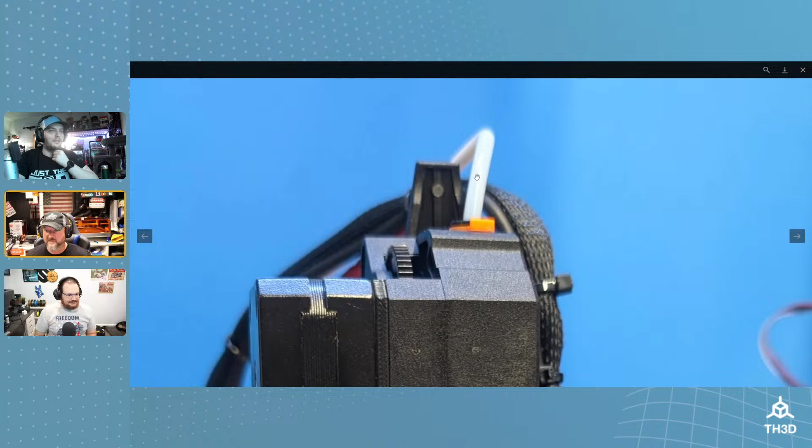Yeah, that's a kink. What's a kink? No, it's fine, it's fine. It's just going to the tubing.

Do you notice that I just, I broke the ABL mount and I just printed it in whatever color was in the printer? Yeah, I accidentally grabbed it and I was moving it and I accidentally got it stuck, and my finger, it cracked it. So I just printed it in a new color.

But my wiring's clean, look at that, Tor. Do you see the zip ties? Do you see all the zip ties there? Yeah, I need to go.

Is it a fast printer? No, it's like 100 to 120 millimeters a second. It's not, it's for big shit. We keep it because we actually get quite a few print jobs with big build volumes.

So yeah, look for tools. By the time it finishes the print, Bambu's released the new version of their studio, haven't they? Probably. Yeah, I like my Chiron.

I've wanted a Chiron just to gut it, pretty much for the size of the bed. I still have a S4. Scott Kane is disappointed with the lack of glue on the bed. I need more glue, there is bed cement on there, I just touch it up.

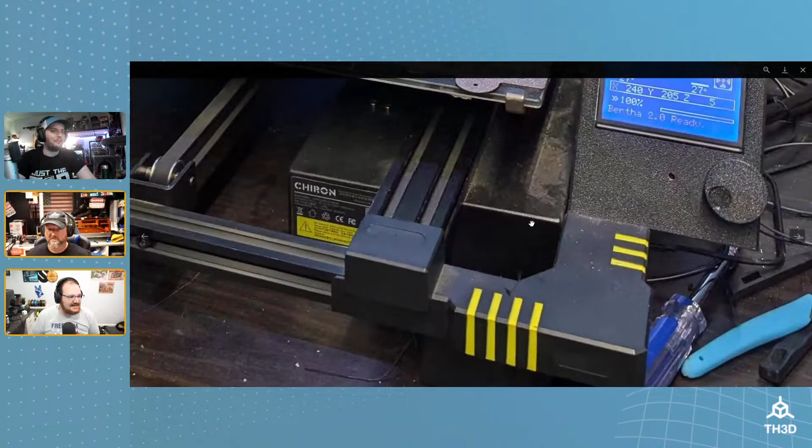Did you put a space blanket underneath the bed? That's what that looked like, with that old gash in it. I don't want to talk about that. I may or may not have paid attention. It's next to the garage door. If you look in the streams when I'm in the office, it's the one that's all the way to my right.

The racing stripes look good on it. It's gotten some wear. Yeah, it's Big Bertha V2. Bertha is gone, Bertha got killed on the way back from the first Rocky Mountain event.

I actually reused quite a bit of parts from Bertha onto this one. Not a bad setup, and it's gotten a lot of big customer jobs done.

Okay, so the next one is from Rick Smith. He said this is an IDEX printer with dual 5 kilogram rolls. Okay, that's gonna snap soon.

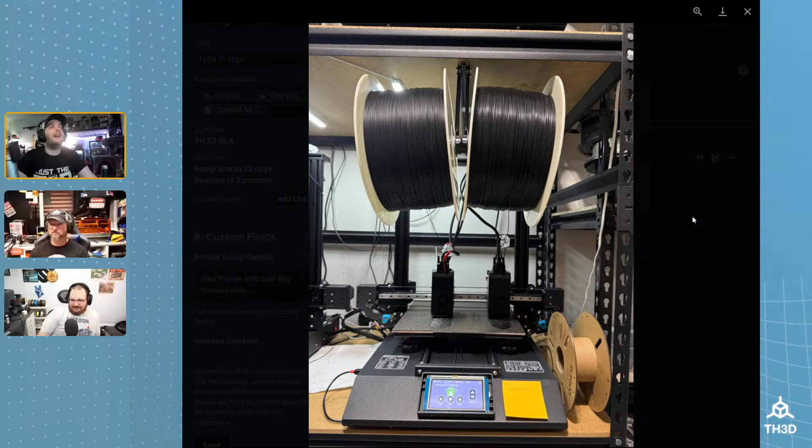Wait, how is this? Hang on, oh, okay, that's clever. He bolted extrusion, I'm assuming, to the top of his printer. Look at that, yeah, it's just struggling. If you swing them, it's like steel balls clanging back and forth. That looks like you get something to play with there. Little dust, how many toys.

How many times have those fallen? Rick's actually in chat. I gotta know. Well, I don't think they're going to fall because they're both opposing and they stop each other from bending any further. That's why I was just wondering if one's gonna swing off and slide. Click, clack, click, clack, click, clack.

What printer is this? It looks like a Tamagotchi. It's got some DB9 serial connections going to the hot end there. I know that printer from somewhere, I've seen it before. I'm trying to find made in China. No shit, swap cables, there's a post-it note.

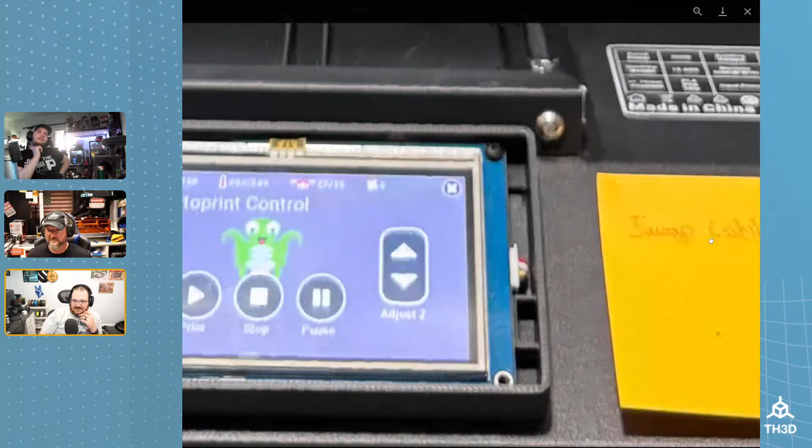Octoprint control, what is this? I'm intrigued, what is this? There's like Octodash and stuff you can plug in. Looks like one of those little Raspberry Pi screens you can get. Is that what that is? Or the originals, I haven't seen it. That's actually pretty slick.

What printer is this? He didn't say, hang on. He didn't say what printer it was. No, he didn't. What printer is this? Yeah, it's just an IDEX printer. Rick, what printer is this? What did it start its life as? Before 2020, I'm guessing.

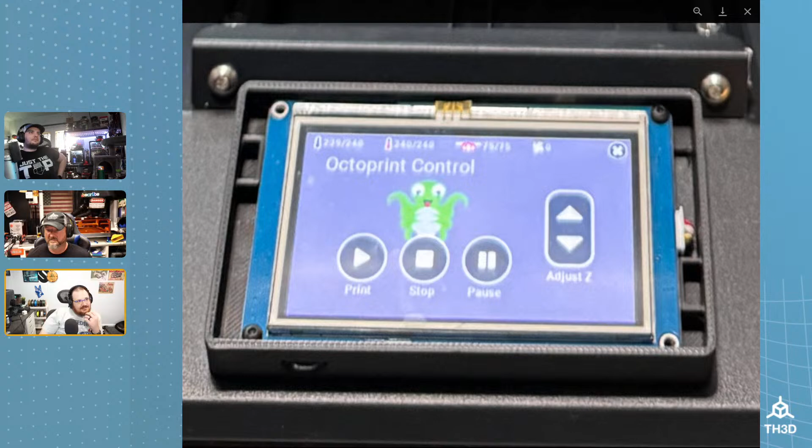So basically you can write custom code on here, flash it to display whatever you want, and ingest data and send data out. That's slick. I would put a cover over this, but man, this makes me nervous as shit having all this over the printer.

Like, so my brother Doug, again these are those racks we were talking about on the first printer. Doug actually made brackets that hook into the little holes here and clamp onto these to bring the spools out in front. Yeah, Nextion, that's what it was.

Nextion display, is that a Nextion display? Because I've played with those before, those are cool. And as heavy as those are, that's over 20 pounds of filament there, I would get a piece of iron pipe with a floor flange, put a T in, just put on a pipe with 2 connectors sticking out, and then you wouldn't have to worry about it.

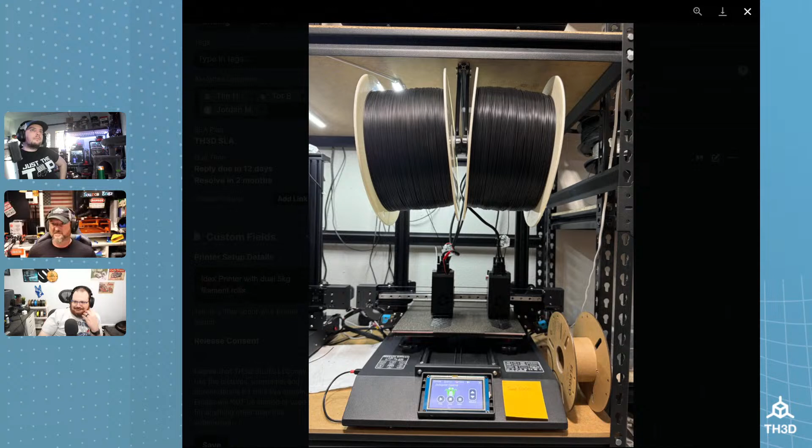Interesting, he said it's got an old 8-bit board on it. It's still $500 for that printer. All right, give me one sec.

This is one of the cleanest and quickest upgraded Ender 3 V2s. This is from... I'm going to butcher this name, I think he's in the chat here. He said he's in Stockholm. Kagate? I'm sorry, I totally butchered your name, I know I butchered it. All right, let's see, he says the cleanest.

Wow. Sorry about the nose, my allergies are kicking my ass.

Okay hang on, this was a 3 Pro wasn't it? This looks like a 3 Pro. Am I... oh, Ender 3 V2. I think I'm getting 3 Pro vibes because of the temperature and stuff. Doesn't look like my 3V2. Hang on, I'm gonna open this in a new tab so I can share this and have a little more control, just use my browser's native thing. Oh god, it's freaking out. Oh wait, no, it just zoomed in too far onto the black spool.

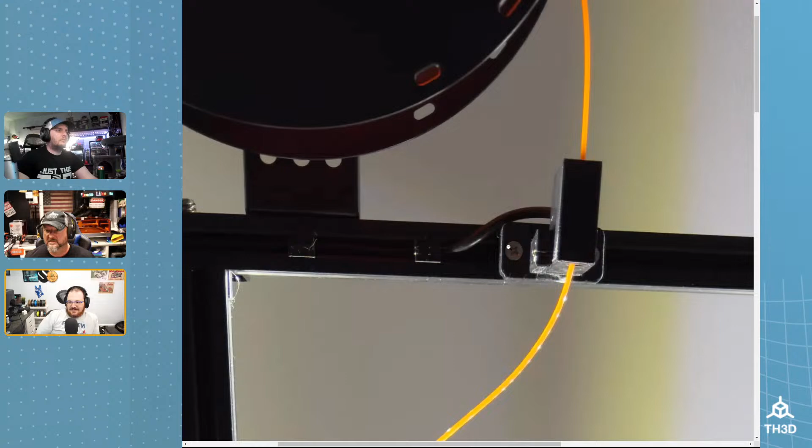Okay, so we got dual 50-15s. Wait, hold up, why are we using a 50-15 to cool the hot end fan? I never understood this, it really doesn't want heat creep. Why? I like this though.

Here you got a little switch for the LEDs. I'm assuming this is the main power switch, the Pi. This is clean. I don't know why you wouldn't just put an axial fan on here. Maybe you didn't have one.

I like the lights in the channel here. I used to do this on my printers and it was a pain, a pain in the ass to put the LED strips in the channels here. That's why I just bolt our Easy Neos up top. But I used to do this on my printer builds.

It wouldn't be a picture from someone in Sweden without something IKEA in the photo here. Bam, right there, IKEA batteries. I'm looking for... are there Swedish meatballs in here? Can we find some meatballs? Can we get the complete Swedish experience here? No, I don't see any meatballs.

Okay so here's the thing, you can make this look all clean, but does your enclosure inside here, does your wiring look like Tor's? That's the real question here. Well, he was at least smart enough to cover it up. That's why I have the dark, very not see-through acrylic on top, so you can't see your shame. You're hiding your shame underneath panels.

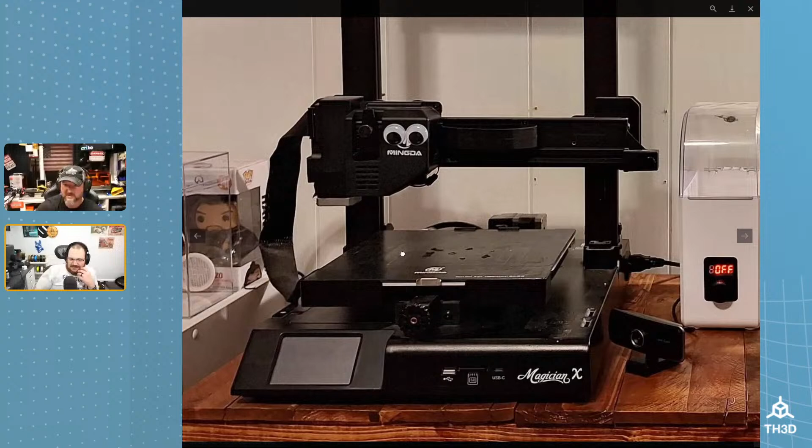I'm just curious. Okay, so we got a filament dryer. I mean, these are pretty clean. This is stock, he just put some googly eyes on it. We got him and Scott Kane could be buddies here, they can be googly buddies. We got a Pi cam off to the side here. We're still running the stock power supply. That's ballsy. We got a protector on our CR Touch here. The control knob looks like it's full of filament.

He's got another one here too. These are cool setups. So you've got some printed extrusion covers. See, I used to like all my printers to be all color matched and everything, and now everything's black or whatever's in the printer. I'm just printing off whatever it is, I just want to get it done. This is pretty clean. Is there another angle of them? Nope. I wish his binder clips that he's using to hold that bed in place were a little more fancy. I hate these.

So this is what people used for years to clip the glass on, including myself. Oh yeah, I've used them too. Yep, you'd have to put them in place to make sure your hot end doesn't hit it when you're probing or printing, and you'd also have to make sure you have enough of them. He took the time to make it look nice and fancy, and then just added those damn things and ruined it. Okay, I was right.

He said the little thing is for a jumping spider. She died. Yeah, we had a jumping spider, and I bought a little enclosure for it, and somehow it escaped. So there's a jumping spider in my house again. I heard they're cool little critters to keep, so maybe I'll find her in the house again. I found her in the living room, and I even gave her a fly and a cricket, and she was like 'nope, I'm escaping from this enclosure.' I don't know how she got out.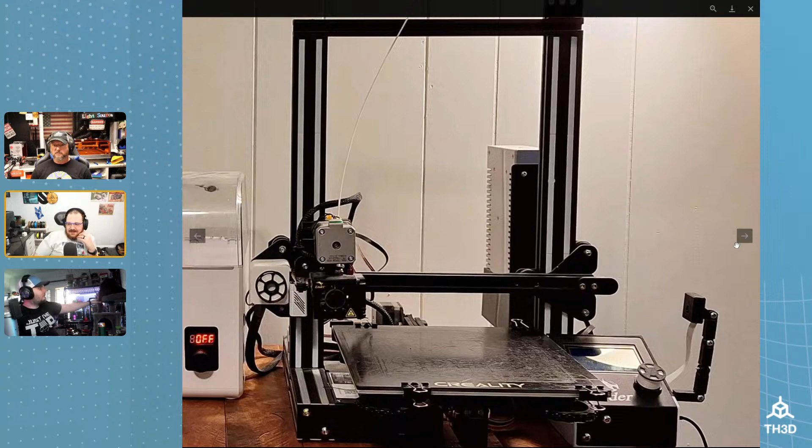All right, and he's also got resin printers, and he said the cover's all screwed up from the person. Yeah, actually it's kind of cloudy. I have a resin printer from Matt Farmer, where he got resin on the thing and it clouds it all up. I hate dealing with resin so much, it's so messy.

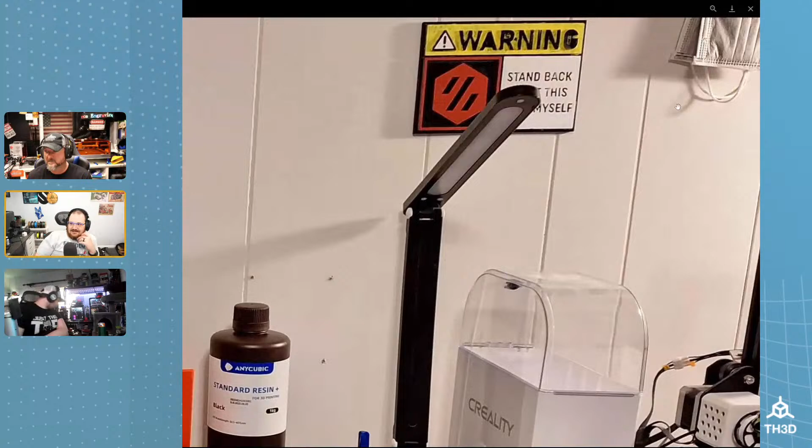Wait, there's a Voron thing here? Why is there a random Voron sign? I'm assuming it says 'stand back, I built this by myself' or something like that. I see we got... I didn't see this in the other photo. We got masks here for the resin printer. Yeah, resin, it's accurate, but man it's nasty shit.

Well, I couldn't tell what the little figures were down there. Oh, those were those little Funko Pop things that people collect. Funko Pop, I didn't know what they were, the characters themselves. Yeah, like what is he a fan of there? I have no idea, I don't know them well enough. Yeah, I don't know those well enough.

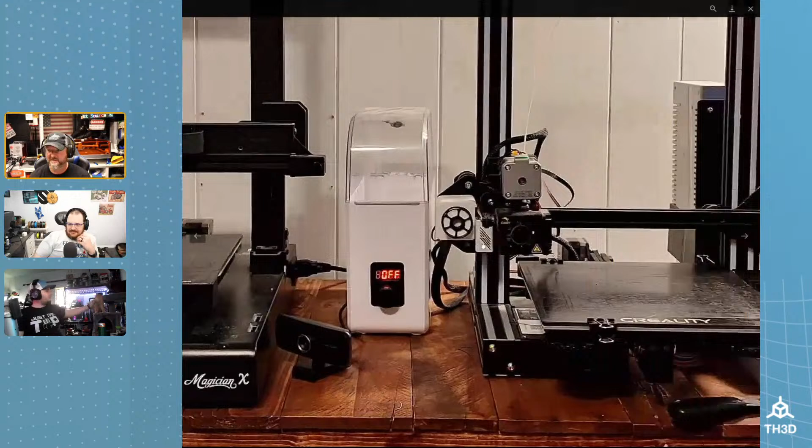Oh wait, there's a little 3D printed lamp or something here too. That looks like the Flash's helmet. The old Flash, is that what it is? Mm-hmm, yeah, OG Flash. I like this. I do like this little table that you made for him, this is cool looking, kind of a rustic feel. All right, that looks like it did not come off Facebook Marketplace.

No, it did not. The next one, this is a second submission from Katagi, and this is a hype... wait, hang on, it's a scrap parts printer. It's using a Ramps 1.4 running Klipper with a Pi. It has a replica Prusa MK3S extruder, having parts from a Voron, a Voron Trident, a Hypercube, and an Anet. Oh, this is a hodgepodge.

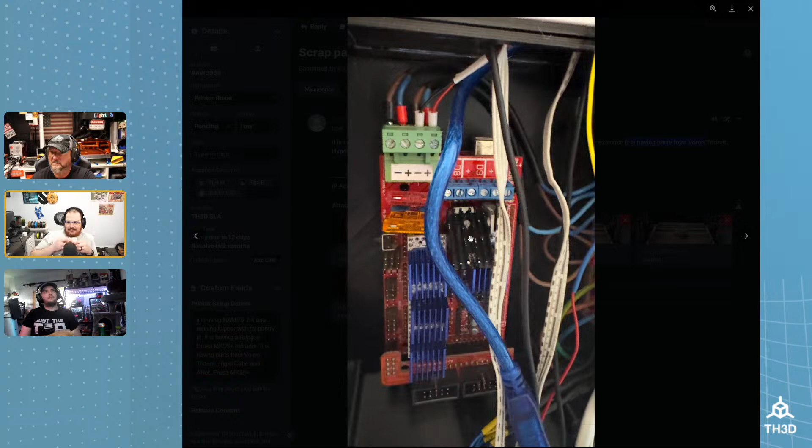All right, oh man, really, yeah, I remember people. So I don't know if you guys know this, on the Ramps board the MOSFET for the bed were known to overheat, so people would bodge heat sinks onto them like this. That was a fairly common practice.

This looks fairly clean for being just a random shit printer. Yeah, that looks way better than what I expected. And it prints, look at that, it actually has a print come off it. And you can tell it printed it because it's got the little wispy there from where it moved the bed down. The print looks good too.

Yeah, he's got... I like this little thing, so it's a little thing you put on the shaft of the motor so you can see it's spinning. Yeah, it's a good Franken printer. Sometimes if you got enough parts, you can make a decent little printer out of it. That looks pretty nice there. Yeah.

Good job, I like that. I like he's got the lights in the front here, so it lights the printer up all nice. This is a good use for Klipper - it's like an old printer, Ramps board, custom setup and everything.

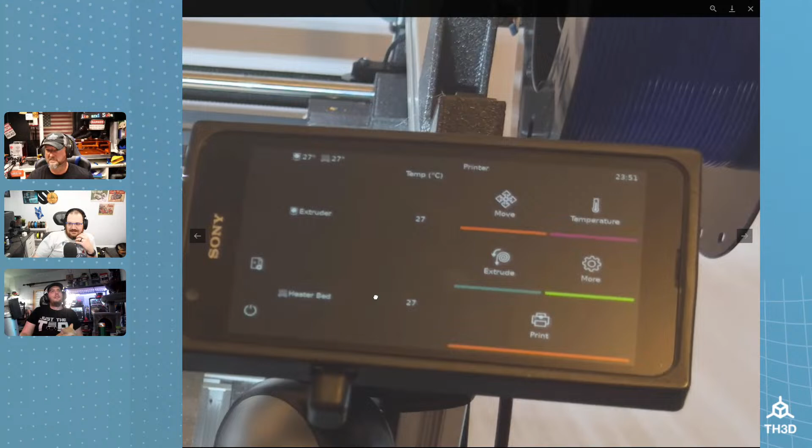This is what Klipper was. I didn't even catch this - this is an old cell phone. This is an old Sony cell phone. When was the last time Sony made a cell phone?

Oh man, okay, you don't have to write his name down. He already had one, but I'll mark that. I didn't realize that was okay. So, Nicholas Bates - I think it's Bots, Baatz.

He said nothing fancy, almost bone stock, but a newer motherboard. An ANET A8. Oh, my ANET A8. Wait, oh okay, I know what he did.

So this was a mod you would do - you would print this to plug up the stock LCD, and then you move it to the front. Look at, someone had issues with interference - look at the foil tape on the LCDs.

I've done this before. I totally forgot the ANET A8's frame was literally threaded rod for the bed, for the Y-axis.

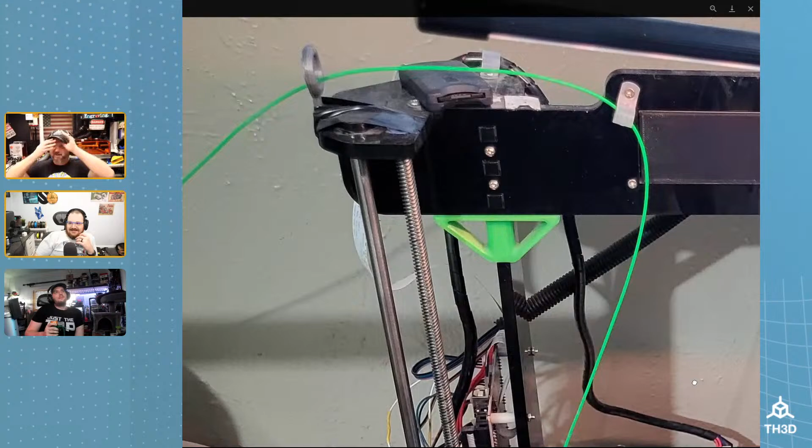His filament guide is killing me. Wait, what? Hang on, oh, the filament guide - it's just like those wire guides. Oh my, yeah, there's a wire guide here. This came with the printer - they included these little printed eyelets, and then we've got...

Yep, he said he upgraded the board. This looks like the factory board, unless he put a newer version of the board. There's a bunch of - this is the stock idlers, the injection molded idlers. This is the stock hot end setup.

Yeah dude, this is how it was - you just had like the wires flopping about. They would break all the time, so people would print strain reliefs and stuff on them.

Yeah, the stock power supply, stock heated bed cable. Oh man, I would check - in all seriousness, I would check this heated bed cable here. These were known to catch on fire, and so were the power supplies, as well as the power input terminals here for the bed. That's where the fires originated from.

And make sure you're running actual proper firmware - we have ANET A8 firmware, so you should. It hasn't been updated in a while, but it still works. It's got thermal protection. It's on our website - we still have it, and it's free because we're not doing updates to it anymore.

But that takes me back - it looks like the 3D printer equivalent of quill and ink. That's so old. Hey, you know what...

This thing was my first printer, and if I hadn't suffered through this thing, I would not be where I am. Like if I started with a Bambu, I would have no idea how to troubleshoot a printer. Oh yeah, exactly, no idea.

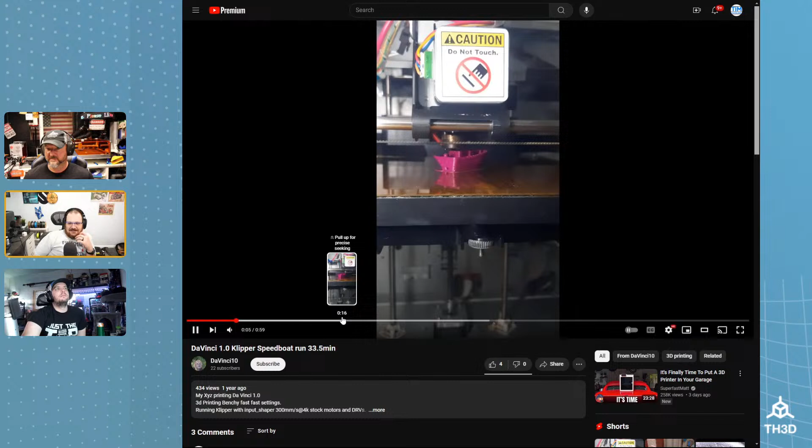Oh, wait, hang on, is this him? Hang on. This is a speedboat run for 33.5 minutes.

Oh my gosh, 5 years ago that would have been fast. I know, right?

Let's see, I'm gonna creep on his channel. Let's see how many channels. Man, okay, so it does work. He's running input shaper on it too.

Oh my god, it's so loud. Oh, wow. Oh, man. Oh my god, let's see.

You can use that damn thing as an alarm clock in the morning. I know, right? I don't know if this music's copyrighted or not. I mean, hey, it works, it prints. What is this?

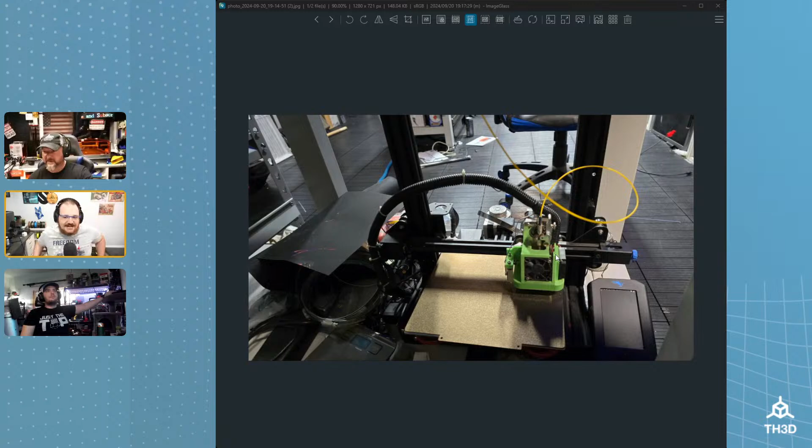All right, let's see Patrick's shit box. Hey Patrick, didn't I send you an EZABL? Yes, you did. So what the fuck is this? Greater, yep, I think it should have a nice bent point on it too.

It's all bent up. Oh, I can see it. It should come straight down, but there's like 5 pixels here. Yeah, it's got just a slight cant to it.

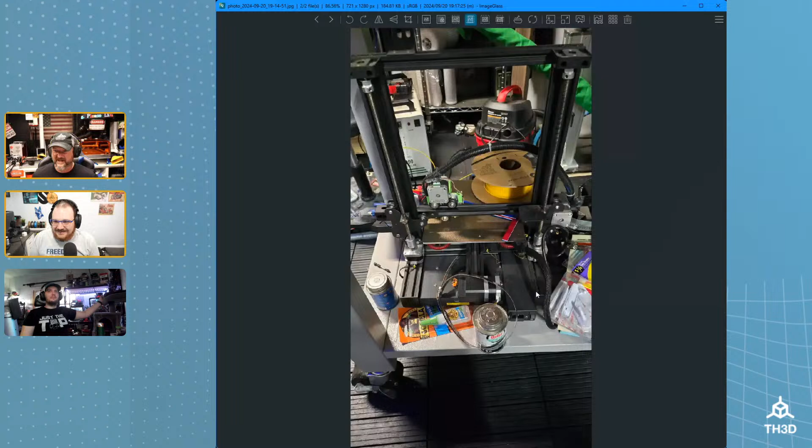Patrick, yeah, you sent me stuff. We were going to do our stream so I can do all the upgrades to it. What did we have last week? Was that the TH3D Nation, or did we have a hangout? Yeah, so next week, okay, so we'll just do a hangout next week then.

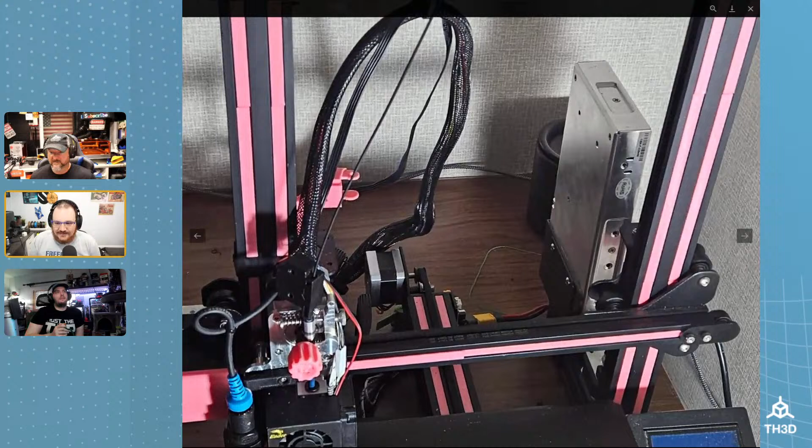So when you have a direct drive printer, I know it's a little bit hard, but you can use PTFE tube or piano wire as a support method. What I typically do with a direct drive, especially on these, is I'll still run a PTFE tube as a guide tube, because you can shove it into a lot of these direct drives. Then I'll take the old extruder and keep just the base part with the fitting. So you still feed the filament in back here, but it's called a reverse Bowden, and you just use the PTFE as a guide tube. Then you can run your wires back just how the stock setup was, so they stay out of the way.

Yeah, not a fan of that. No, there's a camera right here though. This is a cup holder. It is a Wyze cam. Actually, you know what it's for? It's for holding shot glasses because it stresses him out so much.

All right, let's see, printer's driving me to drink. Yeah, this cable, he has a PTFE tube on this one. And the sensor's not mounted correctly.

So what is strain relief? Yeah, that Micro Swiss has that little hole right there to mount those cables.

I don't know if it's from my background in building computers for years, but wire management, I'm so anal about wire management.

He upgraded. It just looks like something tried to scratch its way out of that enclosure. Right at the top, is that like little holes in it? He's trying to scratch its way out, probably.

Actually, my cats have gotten on top of my little grow tent enclosure, and they do love to scratch at it. Yeah, is that right, little crapper? Yeah, your little shit, okay. So that's Mr. Buddy D81 in chat.

All right, that is all of the shitty printer submissions. So how many do we have in total? Twenty-nine, that's a lot. I think this is our biggest one yet.

Oh hang on, Ethan, I'll make one more exception. Ethan submitted one, this is actually the last one, do not send any more in. I just won't read them. Let me see here. Or is it?

Wait, hang on, is this old? Oh wait, he replied here. This was that one that had the Raspberry Pi heat, the weird control board. No, the board on the side. He said it's a janky circuit board on the side.

On the side is a voltage step-down to be able to adjust the brightness of the LED strip. It's like $8 on Amazon. I really want to move the Pi as well, but yeah, if you notice, there's a Pi cam. I also have to get an extension cord for that. Oh, and that oversized heatsink is my old Raspberry Pi heatsink.

Which one was that? I'm just looking at the photos. This is that one with the weird slice on it? On the Y, it was like super tall, on the Y motor. Yeah, okay, thank you for clarifying that.